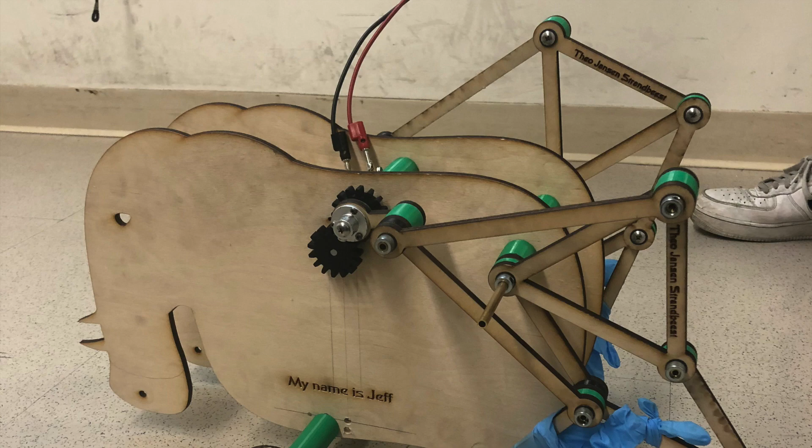What you're going to need for this homework assignment is your GeoGebra file with your Skew Pantograph mechanism, and then your SolidWorks program. I hope it's up to date, otherwise you won't be able to open past versions. Lastly, you'll want a snipping tool or some other note-taking software, whether it's just paper or a notepad.

For this first part, I'm going to open up GeoGebra and SolidWorks, and take a screenshot of my file and put it onto SolidWorks. So one of the first things we're going to do is open up your snipping tool or screenshot source. You see I already had it open from before, and here I'm just going to select new and take a screenshot or a snippet of the part that I'm going to measure out.

This process is very important because we're going to use SolidWorks to get the dimensions of the parts we're going to create. After you have the screenshot, you're going to go into SolidWorks and open up a new sketch. Then I'm just going to hit spacebar, select the plane, and copy and paste this in there. So now I have my screenshot in the picture. I want to make it a little bit larger and center it. Hold on, misclick a little bit.

So I have my model right here, and now I'm going to begin actually measuring the parts out. Before we begin, I've minimized GeoGebra and my snipping tool, and now I'm going to have just this notepad open so you guys can take a look at the steps I'm going to go through.

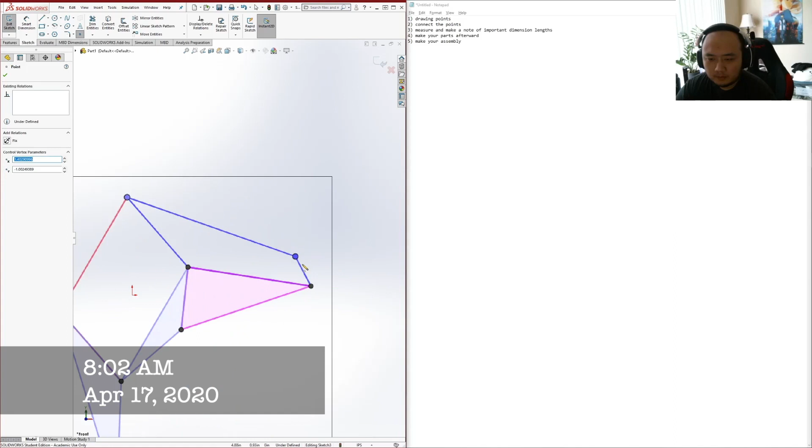So now I've put all the points on there. You may not be able to see the points after I've actually clicked on it. That's because they'll be removed once I remove the picture—or sorry, they'll be visible once I remove the picture.

So let's take a look at what that's going to look like. I'm going to first exit the sketch. I'm going to click this picture. As I pulled it away, you'll notice that the points are right in front of the screen.

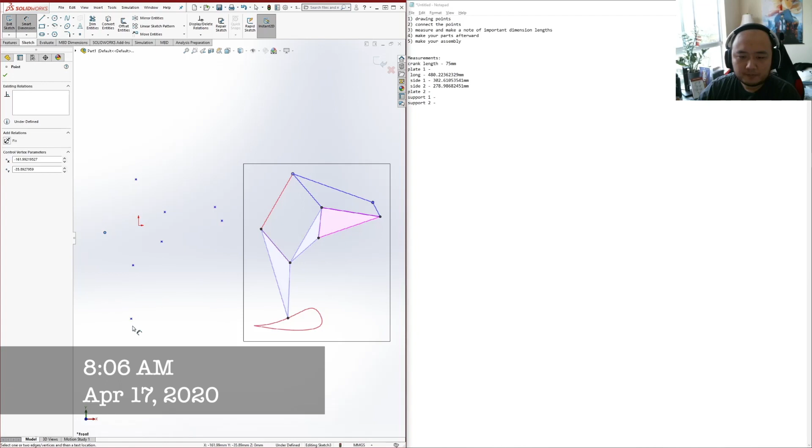I'm still on smart dimension. I'm going to measure dimension number 1 here and put that in. This is going to be my long side again. Then I'm going to have short 1, short 2, and we'll fill in those measurements when we get them. So now to measure this length, and then I'm also going to measure this length.

That's not correct. There we go. All right, so now I've put all these lengths on here. One thing you can do, especially when these lengths are quite similar, is take a screenshot of the dimensions of the triangles you're actually measuring out. That way it's a little easier for you to recreate when you make the parts.

Lastly, now I'm going to delete these three again because I no longer need them on my screen. I'm going to measure out these two supports. This top support here is support 1, and this one over here is support 2. So I'm going to click here to here and measure that out—that's going to be 211.

And then I'm going to exit out, delete that, and now get this measurement—about 301.43. And then lastly, and this one is important enough for you to consider, I will measure this distance out.

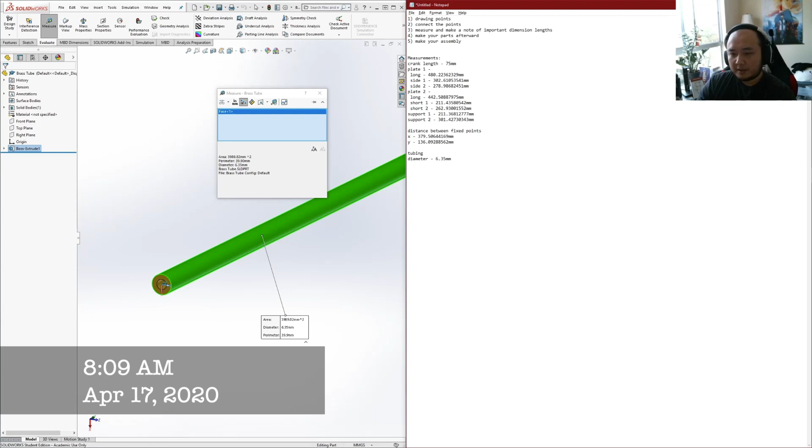This way I know to make the inside face or the inside connection points of my parts 6.35 millimeters.

To amend my measurement earlier, we do have an inner diameter measurement taken on the tubing. However, we will make it a little larger to fit the bushings, and this little outer diameter is going to be used to make the part a little more sturdy. This link width is what will allow us to make our final dog bone shape, and this will be in the files if you choose to use the ones I built.

So the following video, which may be muted, will just be me working through how I actually built these components. If you want to get a review or a refresher, see the mistakes I make, show that I'm human, that's entirely up to you. But here I'm just going to start with the first item, making the crank length of 75 millimeters, and I'm just going to start going with it.

So here I have just kind of gotten my endpoints. I have not defined any of the distances or the sizes. I'll do those in a second, but you'll see me creating the relations between the sizes just to make things a little bit easier for myself in the future.

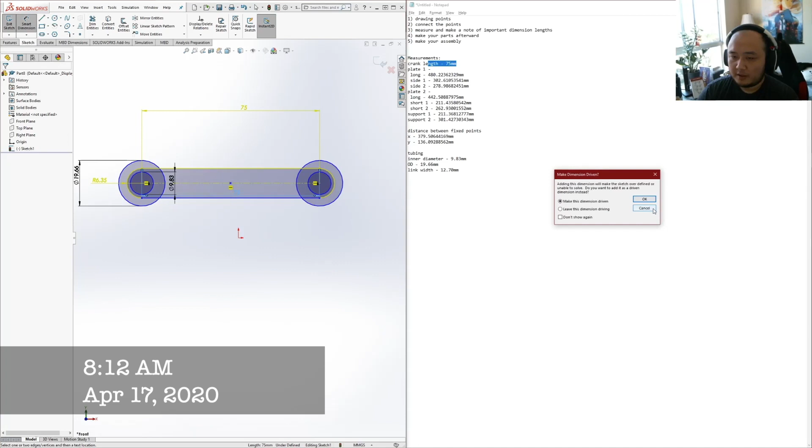If I did the width, ergo this measurement from here to here, I misclicked there. From here to here, you'll see that is 12.70, so we did that correctly. I'll just define that and cancel it. So now this is ready to be extruded.

I'm going to exit my sketch. I could have deleted some lines, but I'm going to do this a little bit faster, so you don't have to. I'm just going to define the parts that I want to extrude right here. So you have this out like this, and then it's going to be a quarter inch thick, so it's going to be 6.35 millimeters.

Also, if you want to see how we get there, open up a new window here, just to get it. A quarter inch to millimeters is 6.35 millimeters. There you have it. So that's going to be this part.

We're going to change the colors. You can do this on your own later. I'll modify this later, but just to show you how to change materials or appearances, you can go into materials right here. I'm going to click edit materials, go into the wood section. I'm just going to select pine for right now. I'll change this off screen later, and there you go, have the part.

So now I'm going to save this. I'm going to save this under the self-made, because I made this myself. This is going to be my crank. That's one part down. Let's exit out now.

I'm going to start working on plate number 1. For this plate number 1, I actually don't need to open a file. I'm going to click new file, set my measurements, MMGS, and then I'm going to start making it again.

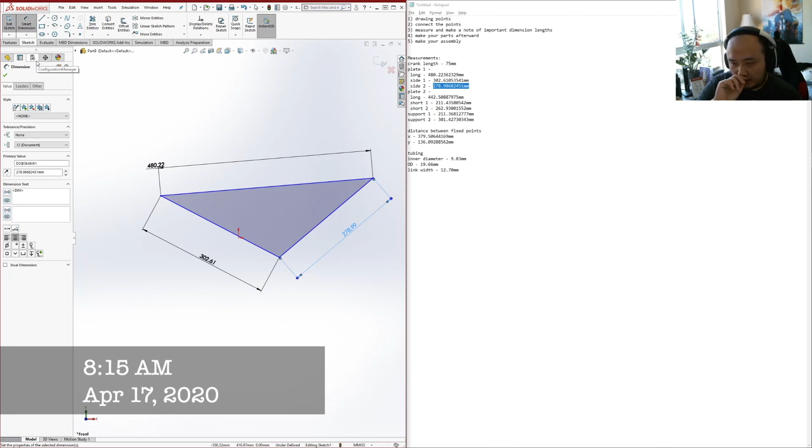So it's going to be 278 millimeters. I'm going to copy the entire thing. And there you have it. This is going to be my dimension part, which I'm going to use to reference my circles, and I'll delete it later.

So the points should all be here. I'm going to use my circle tool now to create these concentric circles. I'm going to arbitrarily give these a length, and then set relations again, so I'll control click all of these, and these are going to have the equal sizes.

Just to save myself some time later, I will also do the outer diameter right now, and I'm also going to set those. I did not mean to exit sketch there, that is not what I should have done. So I'm going to click back in.

I'm going to set the relationships now between these outside circles only, and these arcs should all be equal as well. So now when I change these size settings, you'll quickly see what it should look like.

Now that I have this, I'm just going to delete these center lines because I no longer need them. It does still keep the relationship between these center points, which is what these circles are built on. I'm going to define these with my outer and inner diameters again. This is going to be 19.66 millimeters. That changes everything you'll see now.

And here, I did click on the wrong circle. This is also incorrect, this should be the inner diameter, which is 9.83 millimeters. This outer one here is going to be 19.66.

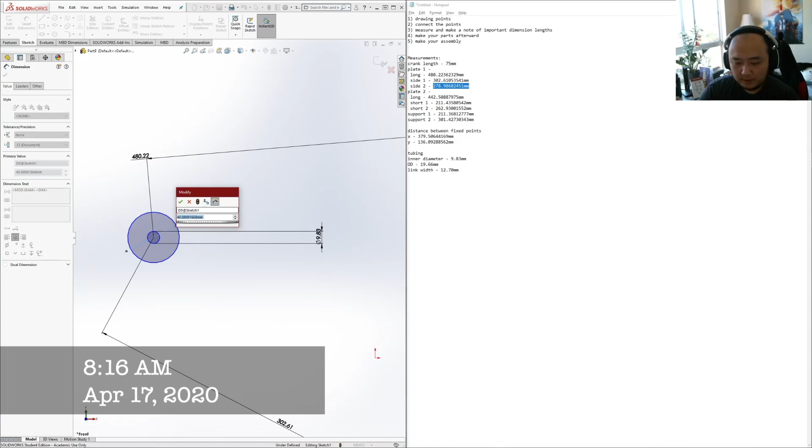Not everything I do is the best conventions, it's mostly for you to be able to see it yourself. And then here I will start making my slots.

I'm going to select straight slot, select here on the center, and then I'll fix these dimensions later in a second. Right now I'm just arbitrarily clicking just to make these slots. Give the center hole, and a random distance, and I'll smart dimension to make all of these.

So this radius is going to be the same as half of the link width I have here. Again, 6.35, that should be a 1/4 inch radius. I'm going to do that with all of these segments.

Here I'll show you how to do it if you wanted to just use the center line. This will be 12.7 millimeters, going to be the same size. And lastly, I'll do it here.

Right, and here I'm going to extrude it. I'm going to go to extruded boss and base, and select this. Now, if I just did this alone, it would come out with errors, so I'm always going to use selected contours here.

And then let's start selecting it. So this one's going to take a little more clicking. I could fill in the insides if I wanted to, but just for the sake of this, I will not right now. That's something you could do though, as an option.

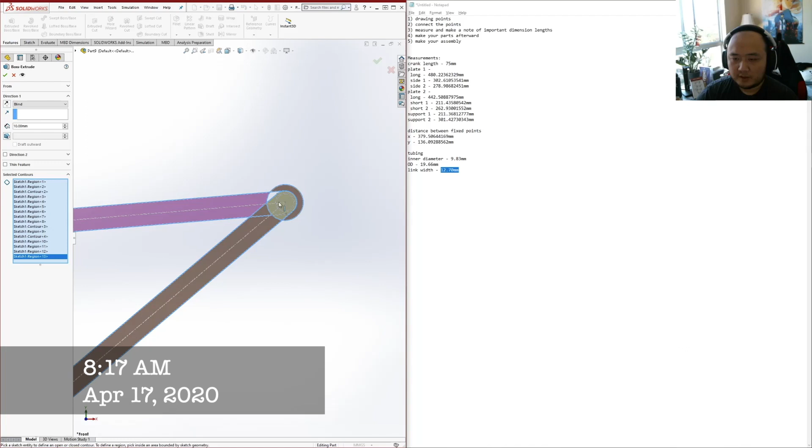So I'm going to select all of this together, and I selected that on accident. All right, so this should all come out. I'm going to make this 6.35 millimeters and click check.

Clearly I misclicked something here. That's one of the dangers of having all these sketches and contours together. It would behoove me to delete some of these lines, but...

Alas, so I'm going to zoom in a little more now. Hopefully I just select faces and I don't over-select any items.

And here I have these parts. I think that should be defined there, and let's see what it looks like. And there we go, the part has come out.

If you wanted, of course, I could select the inside area, that's something you'll have the option to do. I will select these materials and go from there. So I'm just going to keep it pine, but I'll change the color so it's a little easier to see in the future. I'm going to save this, just going to keep the name so I can reference it later. This is going to be my plate number 1, and I'll exit out and start the next one.

So I'm going to repeat this process. I'm going to talk less now that I've gone through these parts, and change my settings and just continue.

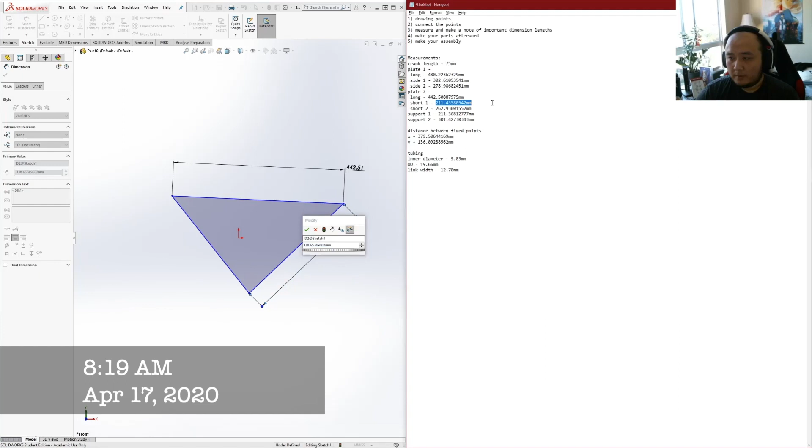I clicked exit sketch on accident, so I'll just click X to continue editing this. Now I'm going to add my circles and continue what I did before.

I'm going to add some relations to make all that equal, and now I'm going to do the same again with the outer circles. Of course, still a little mishap there, but that's okay - that's why Control Z is your friend.

Now I'm going to set these relations again. So click the arc and then Control Select, making sure you don't Control Select the wrong bits. Then set this equal to each other.

Now I'm going to smart dimension these for sizing. This is the outer diameter, which is 19.66 millimeters - by now you should be able to find this on the paper or the notepad I have on the side. Inner diameter will be 9.83 millimeters to fit the bushing. Now you see all the circles are here.

I'm going to exit out of smart dimension and start deleting these inside lines. And here is where these slots come in again, so slot here.

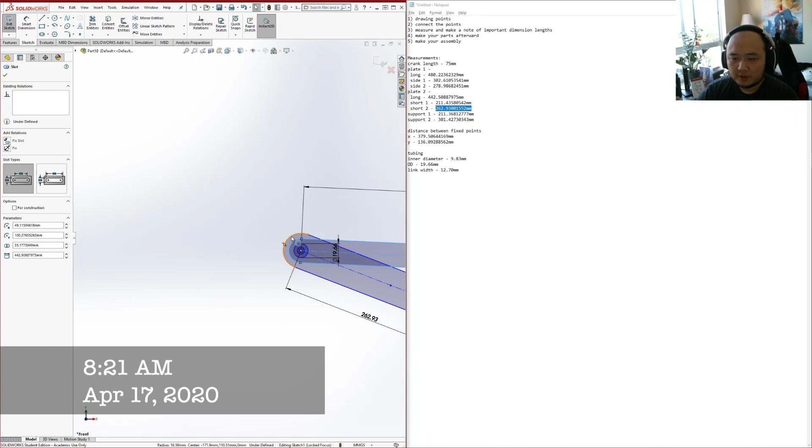Excuse me. And then I will come out here and set these arcs all to Control click and Control click. I'm actually going to clear all these selections because I realized I accidentally selected some extra items, so I'm going to select all these arcs again, at least these outer arcs.

I'm going to set them equal to each other. These do not have a defined length yet, so I'm going to go in here and define this inside diameter as my link width of 12.7 millimeters, and now they should all be the same size. This creates that dog bone shape we're looking for.

Again, if you wanted to, you can also fill in the inside - that would make it a little easier.

Here I'm going to select the sketch that I want to do, to get a better looking face after I apparently fix this. Again, 1/4 of an inch thick. And now I'll get the correct face that I'm looking at. Delete this contour and start selecting items.

This here. Get rid of that inside area - don't want that. All right, select that, and then lastly these tidbits.

You can see that I have the preview on, so it'll show you what the model generally should look like, and this is going to come out fine.

This here I accidentally selected the circle, so I'll just go back in here, and then I'm going to go inside, look from this top view, and just click the center circle. That should remove it, and voila, there we go.

So I have this now, and I will go in here, change the materials, edit material, and go back to my pine wood.

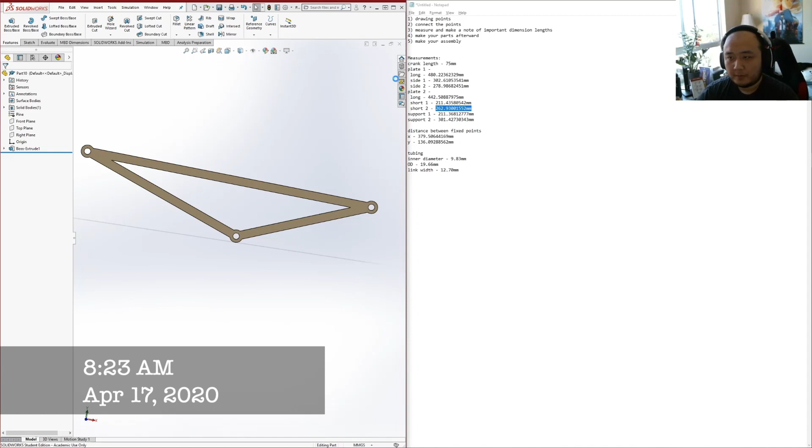This is going to be my second plate. Save it as plate 2. Exit out to save memory, select new, and let's start making our last two bars here.

So here, this is going to be relatively quick. We're going to make it the same way we did with the crank. I don't know why I used the origin in this situation, but that's okay. I'll keep these horizontal - I'll define those in a second.

Just make all these circles here and then make my slots. You'll see that I'm doing this all without giving much of a care for what the dimensions actually look like, because that's what I'm going to address after they exist.

So first, most importantly, since these are already horizontal to each other, I want to make this equal. And I want to make these two also equal. And here I will now define what the distances are going to be.

So center to center distance here for support number 1 is 211 millimeters. That's going in here. So that's been set now. It says 8.32 because I was a fool and I didn't change this to MMGS.

So now I'm going to go select that, go back into editing sketch, and you'll see that it is showing it correctly now. Next I will change these diameters here: outer diameter is 19.66 millimeters, and inside diameter is going to be 9.83.

That's all the way in there. Now it's time to fix up this slot inside. This is supposed to be 12.7 millimeters. These are not the values you change. However, the value you will change is this larger one out here for when you design your own part.

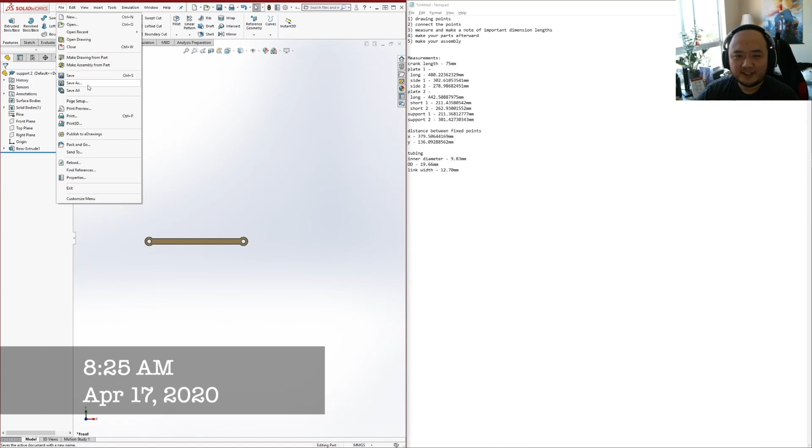Let's go into wood, select pine, apply, close. There we go, we have color. I'll save this as support 1 or 2 because I am a little dumb. So I'll hit file again, save as. Change this to support 1 and I'll just save over the other one as I make it.

So now I'll make support number 2. This time I'm not going to forget to change the units on the bottom. Extrude my boss and base, whatever you want to call it, and do the same thing.

This time I want to make this circle outside, so I'm going to put my cursor over here and align it. Once you see that center line, it means they will automatically be made with the definitions that they are going to be horizontal. I'm going to do the same thing, make it over each other. This will overlap a little, that's okay.

Make my slots. You'll see that I don't really need to worry about the dimensions because I'm going to set those afterwards. So I'm now going to set the relations, set these equal to circumference, same with these guys, set them equal. Now it's just time to dimension it.

So this inner distance, which is again what you'll be changing, is going to be what I copy and paste on my screen for support 2. Inner outer diameter, I don't need to repeat that anymore. I hope not, at least.

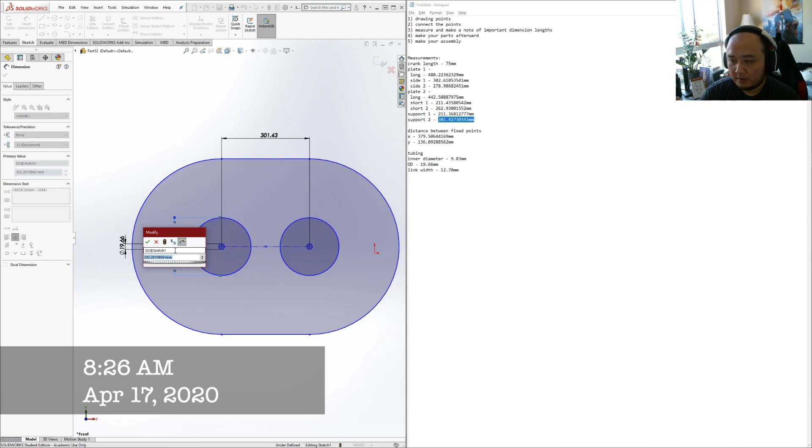I see I set that to meters instead of millimeters. That is not a cash money move, but I modify that to be a little more correct. Now the inner diameter, and lastly this slot distance, which we're going to decrease immensely.

Leave that smart dimensioning, exit the tool, go to features, and there we go. It's time to extrude this boss, and now I get to select my contours. Zoom in. Go over here. And away we go.

Edit the materials, back to the right material. And now what I'm unsure of is actually whether I did the thickness correctly. At first glance it does look correct, but I'm just going to edit feature to make sure, and it is 6.35 millimeters or 1/4 of an inch.

So I'm going to save this as support number 2. It's going to ask me to prompt to save over it because I made the first one incorrectly. And with that, we have all the parts that we're going to use to eventually put this together. And away we go now.

So on the bottom right of the screen, I have some of the parts that I've downloaded off of the class website, files given to you by the professor. These are the brass tube, the bushing, the motor, the set screw shaft collar, and the spacer. I'll probably move some others in the future, but these are some of the parts given to you that we'll be using to make the assembly.

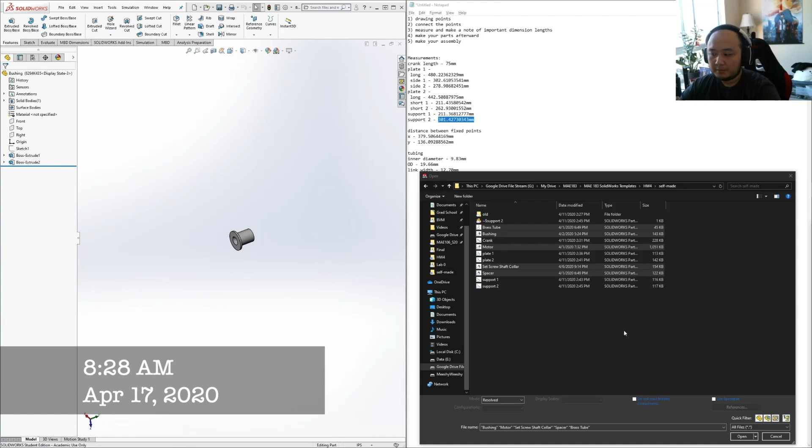So one thing I did add to this assembly before beginning is the base. I'm going to open up the base right now. We're going to modify this so that you can actually create your attachment here. What I'm going to do is first remove these holes because I don't need that anymore.

But for this base, I need to make this a lot taller so you'll be able to see my part actually move. So I know that this is going to be quite long. Of course I can always hang it upside down, but I'll try to make this a little cleaner.

So to double check our height, we can always reference back to our model on Geogebra to see how exactly tall this is going to be. You can also estimate, or I know that at longest extension, I'll go from the longest point here to here, plus the longest point here to here. That should be sufficient for my heights.

And I have those lengths here on my plates. So my two longs added together make it about 1 meter tall. So this is a very large object. So I'm going to go into this model and edit this sketch.

And then it's going to slowly appear. Give me one quick moment. I realized this was extruded from the top, so instead of that, I'm actually going to change the feature.

The feature extrusion will be 1 meter, so this is going to become very tall now as I rotate this. Is this a realistic base for you to make? No, because this base is very small. Just for feature's sake, I will actually make this a little bit wider of a base.

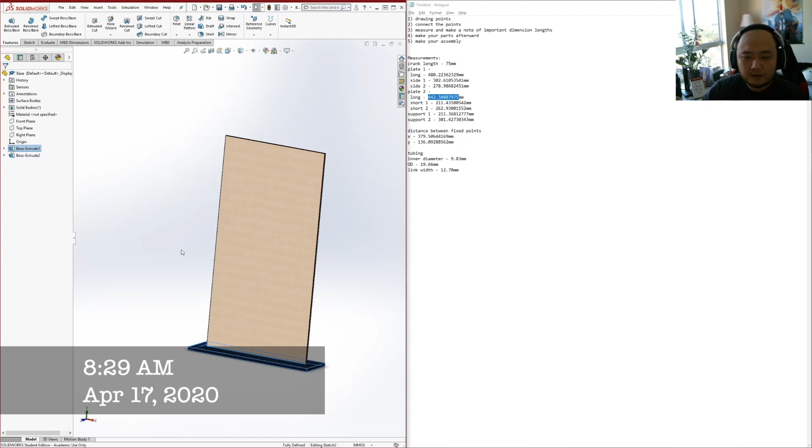So we can feel a little bit better about ourselves, I'm just going to make this 1 meter out, and we'll make this about 1/2 meter across. Nothing too crazy. It's going to look a little large, but that's also because our assembly is going to be a little larger. Now we also need to remember here, the positioning of our distances between our fixed points is going to be critical.

So we can choose one point arbitrarily, and this is going to be, I should make this a negative actually, so this is going to be to the left. One point's going to be to the left 379 millimeters, and it's going to be up 136 millimeters from right to left. So I will choose my right point arbitrarily.

That's going to be a cut done on this surface. And let's face this face now. So I know that my circle should be somewhere up top, because I do want to make it a little bit taller. I'll place it right here. I know that the hole for my brass tubing and bushings is going to be 9.83 millimeters.

And then now I need to find XY coordinates apart. I'll first make the circle arbitrarily, and I will make this relevant to this hole. That's going to be equal radii. So now this is the correct size.

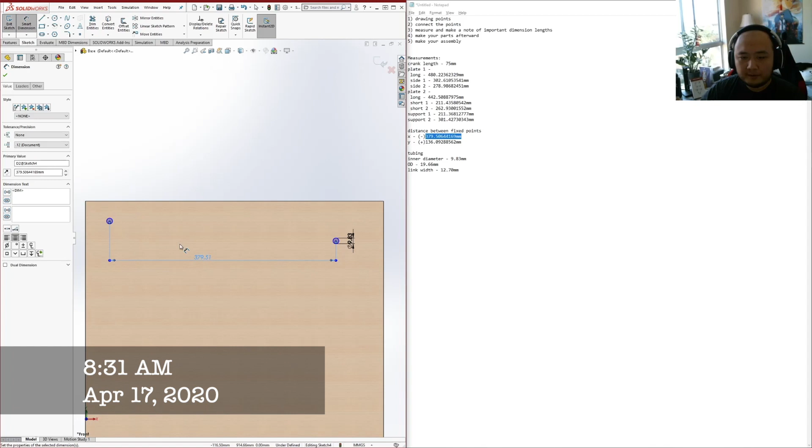And for dimensions now, I'm going to have to smart dimension this to this point, but I'm going to do it first horizontally. This is going to be 379 millimeters apart. Now this is going to be, since this is our starting hole, this is going to be fixed. This will move here. And then I do know that it needs to go up by a fixed amount as well, so I'll click the checkbox here, and I'll smart dimension the y coordinate here.

This will be 136, I don't know why I'm typing, I'll just copy it here. So this one pushed it down, which is actually good for us. I was about to say I should have defined it properly first, but I got lucky in this case. So I'll leave this as is.

I'll exit my sketch, and this will ask me to put my hole through. I think 10 millimeters is just enough to get through this. I don't think that's actually the correct dimensions. This should be, I believe, I don't think it is. Yeah, but I'm quite confident this is a 6.35 millimeter hole, so I'm actually going to modify that right now.

And I think this is the feature I need to change. I think this should be 6.35 for a 1/4 inch piece of plywood. It could change, but this is just so it's the kind of realistic materials you might get. You could also go up to 1/2 inch. You could get a 10 millimeter piece, but I don't think many American companies will sell that to you.

And so this is going to be my base. I'm going to save that now, and then we'll begin with actually trying to put the assembly together without any of the fixtures first, just so you guys can get a view of what it will look like.

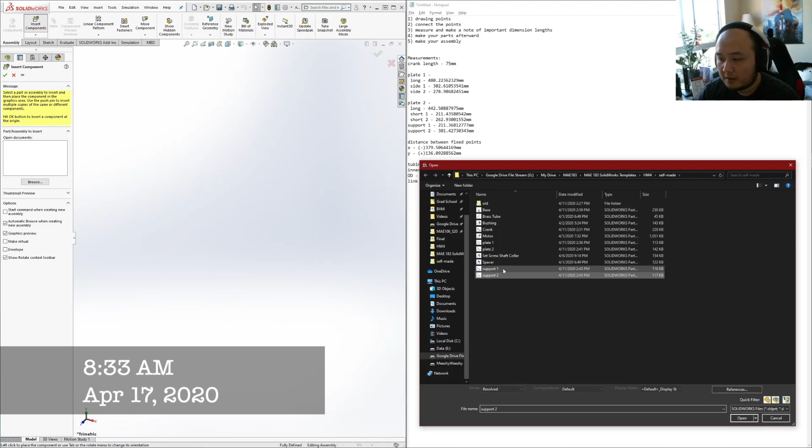Now it's time to make our assembly. I'm going to start adding a few parts in here, and we'll just kind of work through it together. I'm going to do these parts without the additions of the tubings, because those will mostly be concentric mates anyhow. I also do want you guys to see your part together so we can make any modifications before finishing the assembly. This may be a method that not everybody will like to do, but it's sort of how my brain works the best. So I'm going to open up all of the parts that are pertinent to my design.

So the 5 parts I made earlier, not that any of these are not pertinent to the design, but I'm going to open these first. I did forget the base, but I'll put that in here in a second. I'm just going to slap these in here first, and then we'll go from there. Alright, so I'll add one more component. That will be the base.

My very tall base, mind you, it doesn't look too tall now it's here. So because the base is probably the... well, it's the base, I'm actually going to fix it.

I'm going to right-click and hit fix, that way I can't drag this around. The first part that I added here, that's going to be the crank. This needs to be floated, because the first part you put into assembly will automatically be fixed in almost all scenarios. So on my crank, I'm going to start making some mates, just so we can get a general floating design.

It's not going to have any of the actual connections. I want to have everything touching, and I'm just going to have it concentrically move. So I want to pick one of these parts on the crank. I'm going to make it, this is where my motor should be. I want to make that concentric.

I'm not going to actually reference the distance yet because that'll be useful later. And then I'm actually going to open up my Geogebra file, or your screenshot, whatever's better, so I can get an idea of what mates are supposed to go where.

So in this part, I know that this hole here, I'm actually going to need to flip it, so you're going to have to think about this part being 180 degree flipped in a sense. But this part is going to be relative to the moving circle here, so I'm going to mate those two.

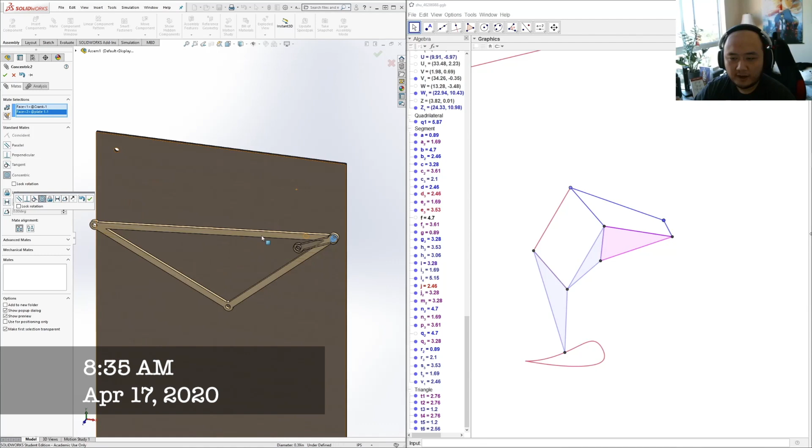Select my mate option, select this inner area, and since it's concentric, that's going to make me very happy. However, I do want to flip it, so I'm going to click this button here and make it anti-aligned. Now it's flipped to look like this.

I'm going to hit checkbox, and as I move this, it can move in, to me, the inside and the outside frames, but it will not move these circles if I actually change the view. These circles are always going to be concentric no matter how this moves.

Even though on a 2D plane it looks good, in a 3D plane they're nowhere near each other. I'm just using this 2D plane to check that this linkage actually looks okay and doesn't run into any other major issues. So, looking at it again from the side, I have this linkage here.

It's going to mimic this kind of position. And now, I'm going to connect one of these bars here. So this shorter bar represents these 2 points, this connection.

I'm going to mate, open up the mating option. I'm going to select this inside face. I'm going to select this circle as well. Make them concentric, but I will not change that other position.

Rather, I will now also create another mate that puts these objects together. So now I'm going to copy that mate. And now when I look at it from the side here, I have this.

So as this bar moves, you'll see what this motion looks like. Again, this view only works in a 2D view, because if I look to the side, you'll see it's not looking that great. See, I can move this in a bunch of random positions.

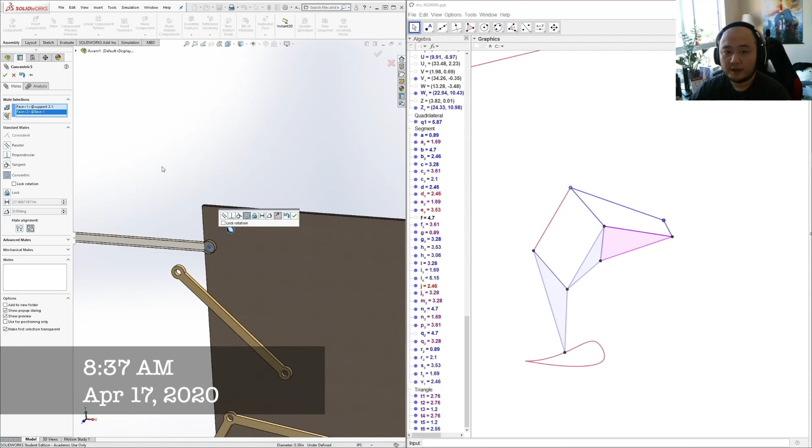So it's like that's concentric. Look at it from the side again here. And now I'm going to have this last piece. So this piece is going to look a bit like this. This can move because it's not forcing these to move.

And this part will also need to be flipped eventually. I will select a mate, and I will select one of the easier mates to do.

I know that this point here will always connect here. The only challenge is envisioning whether this is the correct angle and alignment, or if I should choose the opposite alignment. I recognize that the shorter leg of this triangle should be connected up here, and the longer leg should be outside. So I know that this initial alignment would be correct. You'll see this more in a second.

So now that I have that mate, I'm going to select this inner circle, which will align with this part, and I'll do a concentric mate right here. So that's all set up now.

Now from the side, this does not look very good. I've seen better days. But from this angle, we have the ability to see something happen. Now I need to break the singularity. This is something I am at fault in right here. There we go, broke that out.

It's just a little bit of SolidWorks geometry, but this is my leg. And now as I turn this arm, see I kind of have a little bit of a seizure. This is generally a sign that something may not be working correctly. Note that this one was not created because that's just made by the board. It's kind of useless, wouldn't make sense if you actually made it.

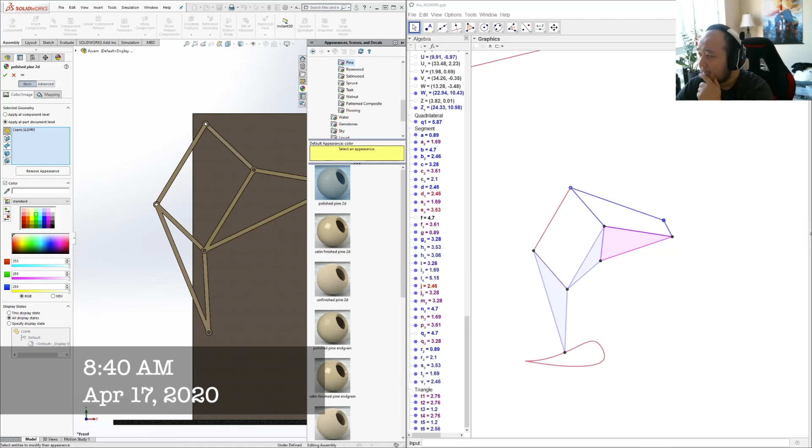So for the crank, which is what I have selected, I'm going to make it a pretty bright green. You can also make it custom colored here, but let's see how much of a neon green I can get. Maybe I'll just keep it a dark green, it's a little easier to see, I think. So I'm going to click checkbox, and now it's easy to identify which one is your crank.

Next, I'm going to look at the coupler and the follower. The coupler I will make blue, and the follower I'll make red. So I'm going to right click the follower, select appearances, do just like I did with the crank, and I'll try to make it an obnoxious red. Check the color blocks, and let's see what's the most obnoxious red I can give it. That makes it obviously red. I think this should be apparent that it's red, at least compared to everything else.

And then lastly here, I will now select the coupler, which will be blue, appearances, plate 1. Here I will select color, and let's try to do... these don't show up very well, but this is a nice dark blue. This should be very apparent which color is which now. We'll select that. For these here, I will just keep them their natural pine color. If you feel a need to change it or modify it on your own, or when you make yours, that's going to be up to you, but do not duplicate these colors.

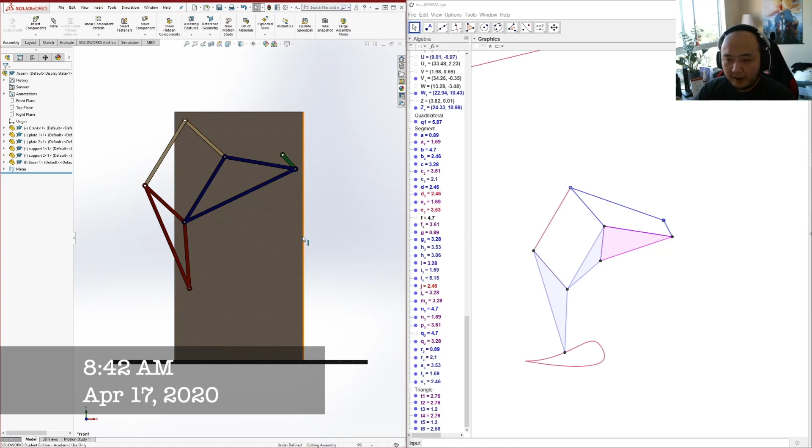The first component will be the motor itself. I won't put screw holes for it in this model. However, the motor will be attached on the back side of this assembly, this face, and it'll peep through. It will have some attachments and connect to the crank. I'm going to first put that on there. You'll see we'll need to make some modifications to the crank afterwards, but I want to first put the motor in before. As we add parts, we'll realize the pecking order of how these linkages and couplers should be put on.

So first I'm going to insert a component. I'll be adding in the motor, which is a file given to you, and I'm just going to click arbitrarily on the page to add it. The important part of having this motor in here is making sure that when you put it in, this hole is going to be concentric with this hole on the board.

Then I'm going to push it in a little closer. You'll see that it'll stick through the hole here, and it won't get past this part. So what I'm going to do is select this hole and make it coincident with this plate, so it's as far up as it should be able to go. You'll see that it's stuck there, and it comes out here.

To me, this hole should be made larger actually, so that you can fit the entire part of the motor in, because there are holes inside of the motor to attach it. I'll make this transparent really fast just so you can see what I'm talking about. There's these holes here that are meant for M3 screws to attach the motor to the panel.

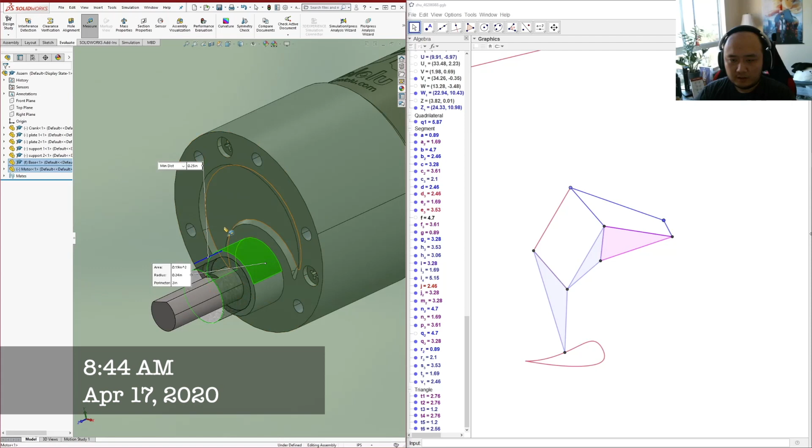So what I'll do is measure the outside of this cylinder. It's a radius of 0.24 inches. So I'm going to edit my part, knowing it's 0.24 inches. I'll make a note of it on my notepad: motor shaft max D is 0.24 inches.

I'm going to get out of the measuring tool, change this transparency back to normal, and select edit the part. You can edit the part in the assembly, which I think is really great—it just makes life a little easier for you. Then I'm going to edit the sketch for this cut extrusion.

I'm going to make this 0.24 inches. Now, one problem here—actually that was the radius, so I need to double that. That's going to be 0.48 inches. See, I noticed it got smaller—gotta be a little smart about my work.

Unfortunately, because this size changed and I fixed these two hole sizes, this one will also be a little too large. So what I have to do now is select this hole, delete this relationship, and use Smart Dimension to define its own size. This should actually be the outer diameter of the tubing—the inner diameter of the tubing, which is 9.83 millimeters.

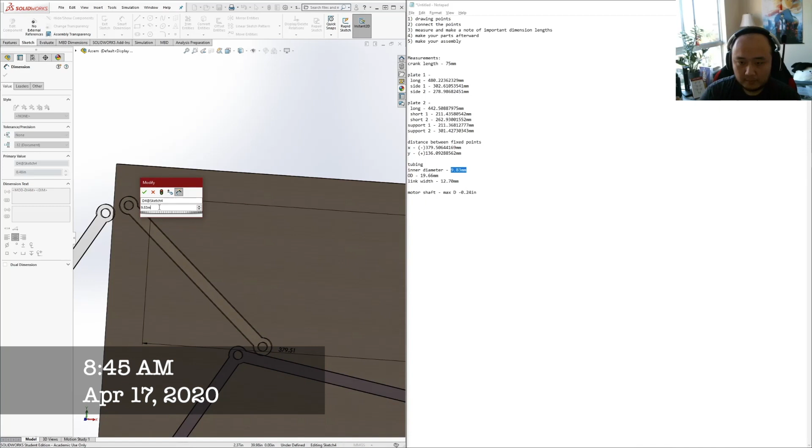So I put that hole in. I'll check my dimension, exit my sketch, and take a quick look at what this looks like. I'm going to exit out of the edit component button, and I should be good to go. Because this mate is a concentric hole, changing that diameter shouldn't change the actual parts itself.

What I will change is I'll go into the mate and delete this coincident mate, because that's not what I want. Instead, I want to make this panel coincident with this wall, and I'll have to slide in a little tighter here. I should have clicked mate first—that's my fault. I'll click mate, select this face, and select this back panel of the board to be coincident. Now this motor is pushed all the way up. I'll look over here—you'll see that it is a very clean fit with the shaft in here.

And now you're ready for the next step, which is going to be to put on the crankshaft collar, which is another part given to you. I'm going to save this as well, because that's a good practice.

Now that the motor is on your base plate, you're going to add the wheel hub, which is another part given to you. Here I click Control Open to show you what it looks like. This is the wheel hub. You will use a set screw to attach your parts, and these holes will attach to your crank. This attachment to the crank is something we'll have to modify the crank to do. I'll demonstrate that after I attach this into the assembly.

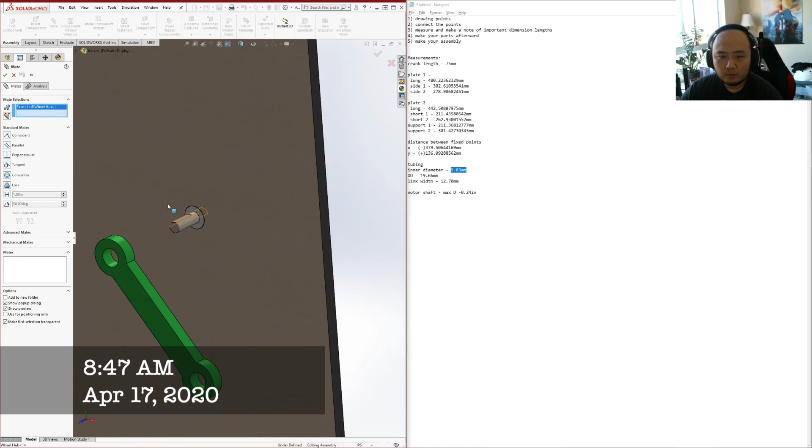I'm going to click Insert Components, and I will select the wheel hub. Click anywhere arbitrarily to place it in the picture, and now I will select a mate with concentricity between the inside of this wheel hub and this bottom semicircular part. Now you notice that this went in backwards, so I want to change the mate alignment to flip it. Now I notice it flipped in the correct direction.

I'll hit checkbox. We can't find the part, it's stuck back here unfortunately, so I'll need to make this part transparent to go find it, and I'm going to quickly drag it out and change this transparency back. That's something that will happen sometimes because of my arbitrary placement.

Now that this part's out here, I do know from experience that this wheel hub is not meant to go past this divot. Essentially that allows you to put a set screw through this hole that's highlighted onto this flat bar of this motor shaft. This is called a D-shaft motor. You can guess why it's called a D-shaft motor.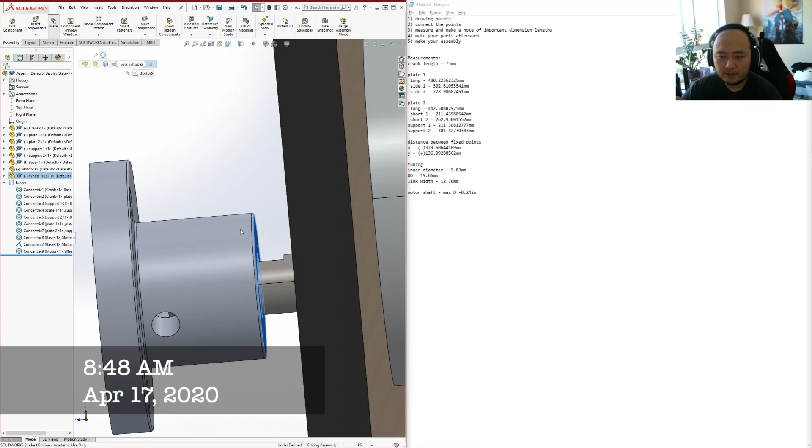I'll try to align it the best I can, hope it looks good, or for posterity's sake, I can just select, now note I'm doing this arbitrarily, this back end of the hub, and then I'm going to have that cap out right here. I don't want it to go any further than that. Now with this a little transparent, you'll see that the set screw will be able to fit inside of this as well, so this will be my arbitrary designation. Select that, hit OK, and now this should be quite well defined while still being able, I believe, to spin.

Now you notice that these holes are not the same dimension as the crank's holes. When I line up this crank, put it face to face here, you'll notice that there's no way for me to actually attach this through these holes. So I'm going to need to open up this crank model and make it the size of this outer diameter.

So I'm going to make a note here. This is a new section. I'll say this is the crank to hub measurements. I just like labeling it so I know what I need. I'm going to clean this up as well. So crank to hub, I know that the hub diameter or outer diameter...

...is found by clicking evaluate, measure, and then this outer diameter. This outer diameter is going to be 1.11 inches. So that's what I'm going to need to change this outer diameter to.

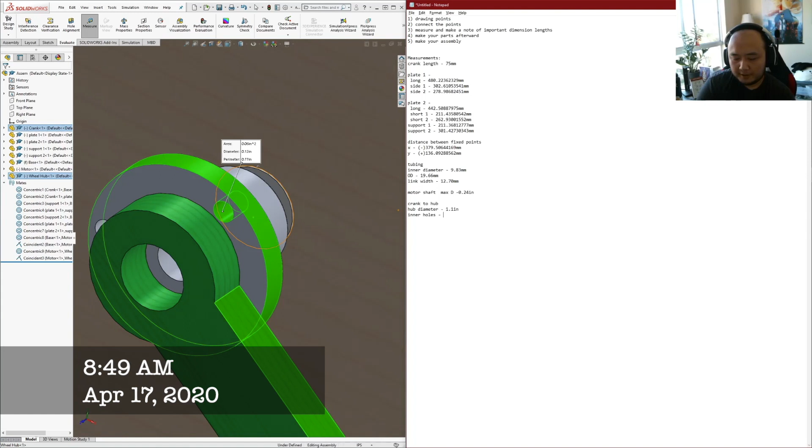And then I'm going to need to align these holes. The holes are going to be 0.12 diameter holes. So inner holes, again I'm arbitrarily naming them. I could also say these are the screw holes. But these are going to be 0.12 inches. And it seems that they're spaced out every third, so this will be 120 degrees. I'll use probably a revolve sketch for that.

We'll go through this together right now too, so don't worry. Speed through this if you already know how to do this. Everything else should stay relatively the same.

So now I'm going to edit this component. Well, first I'm going to click out a measurement. I'm going to right click my crank and then I will edit my part. Now that I have this open, it may be distracting for you to have all the other parts, so if you'd rather rebuild it on its own, that's entirely up to you. I'm just doing it on this assembly because it's accessible.

So here, I know that I'm going to want to create a larger hole. Now I'm going to go in here and I'm actually going to change the only feature on here, this extrusion. I'm going to edit this sketch. Upon editing this sketch, I'm going to modify this outer diameter, which is also going to modify the outside of this. So before I do that, I kind of need to take a step back.

You know, I also make faults too. I'm going to select this outer diameter, this one as well, and I'm going to destroy it. I'm going to delete the equal sign, so that way when I change this outer diameter, this one won't change. But because I broke that, this outer circle no longer has a dimension.

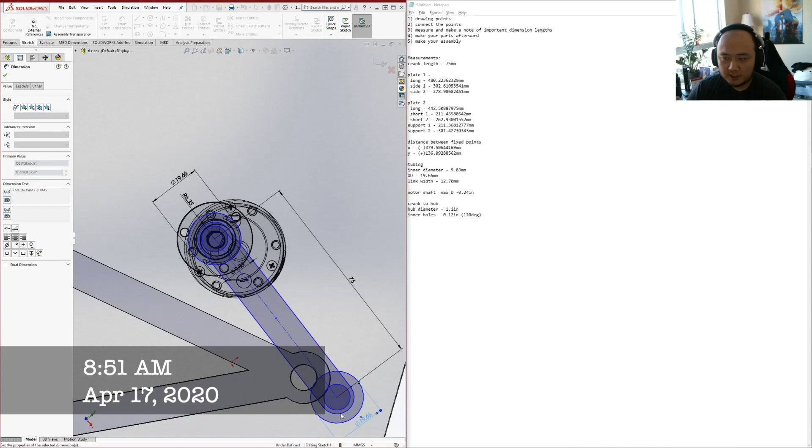So I'm just going to quickly dimension it since nothing changed. It's already 19.66 millimeters, that's the outer diameter of the tubing. Instead, I'm going to smart dimension over here that it needs to be 1.11 inch. This says it'll make it driven, and I think that's because I should have edited this instead of redimensioning that. I apologize for my mistake.

I'll make this 1.11 inches. Now it's the size of that hole. Exit out of smart dimension. I'm quite happy with that.

And now I'm going to need to add some holes in here. First I'm going to exit this sketch just so you can see the component. Now this is nice and aligned with this size, and I'm still in the edit component phase, so now I'm actually going to create a sketch on this surface to put the holes in.

Now putting the holes in, you might ask, should I actually find out where the holes are and build it on top of it? The answer would be no. I'm actually going to need to create a different measurement, so I'm going to exit out of this edit component section. What I need to find is the distance from the center of this circle to the inner radius, or the inner circle here, because they do share that same concentric point. So I'm going to click my measure tool.

I'm going to click this outside sketch line, and I'm actually going to select this inside circle. What this measure tool should show you, if I pull it over here - oh, sorry, I have an extra part here, this face that I need to delete. So now this is going to show me some distances. This is where some math comes into play.

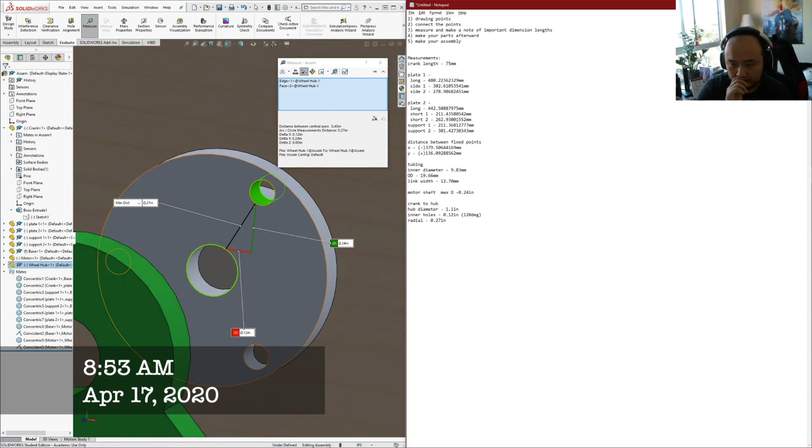In my notes here, I'm going to make a note that I know what this inner hole radius is. There's also an easier way to do this, I'm just not going to do it right now because I want you to figure out how to use the tools you have around you. So I know that this hole, this minimum distance, this radial distance is 0.27 inches. I'll say radial 0.27 inch. And then I'm going to clear my selections.

I'm going to find out what the radius of the center hole is. So this diameter is 0.25 inches, or inner radius will be half of that, which is going to be 0.125 inches. That means the sum of the radial and inner radial portions will get us to the outside of this circle. I'll show you that again right here - or actually no, this brings us to the closest outside point.

So then I need to also add the radius of this outer hole. I should say this is inner hole's diameter. So knowing the radial plus inner radius plus inner hole's radius is going to be equal to the total distance from the center for crank holes. You can go back and rewind that, try to follow me if I lost you on that, but we're essentially using the parts we're given to measure out how we're going to find these hole centers.

So this summation will quickly, if I just do it really quickly here, should be 0.395 - we'll make that 0.3, 0.4, 0.455. If my math adds up.

Just because I'm bad at math, I'll pull up a calculator. 0.6 plus 0.27 plus 0.125, this should be a 0.06. So see, I make mistakes all the time. 0.06 plus 0.125 plus 0.27 is 0.455, which is what I have.

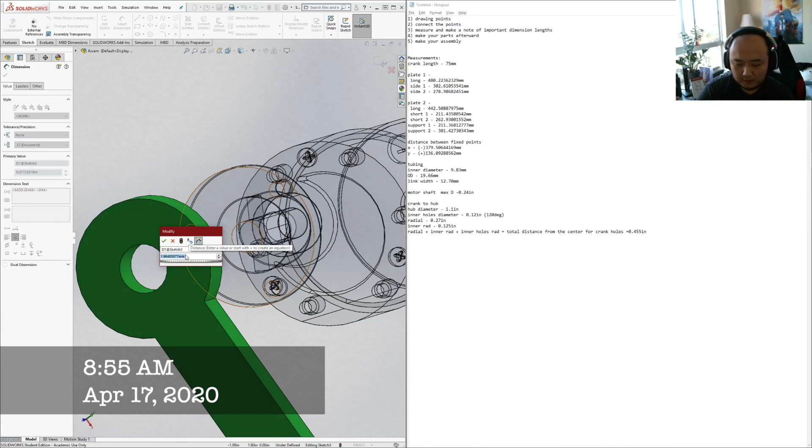And then I'm going to start adding some dimensions. So I know this hole should have a diameter listed here of 0.12 inches. But where should these holes go? I know that this distance from this hole, so I still have smart dimension on this center, to a view from...

Now that I think of it, I actually can't get the center hole here because I didn't create it on this plane. But hold on, let me see if Smart Dimension lets me do this. Okay, Smart Dimension still does let me do that from center to center. So I know this is going to be 0.455 inches, so now this is the correct distance out.

The last thing I'm going to need to do is create 3 of this, so I'll create a pattern. On the top of my screen there's a circular sketch pattern option, so I want to create a circular sketch pattern. I want 3 of them, and I believe it should be out of 360 degrees with equal spacing. The entity I want to pattern is this circle.

Not along this radius because it's asking me to select a point. But what I need to do, and I don't always remember this, is just pick where the selection point is. So I'm going to get rid of that point and try to select this center point instead.

That's not what I want, I want this hole instead. Being able to select this point is actually my main point of concern. I can also select this inner radius because it does share concentricity. Now I just click the checkbox and it'll give me all 3 of these circles defined.

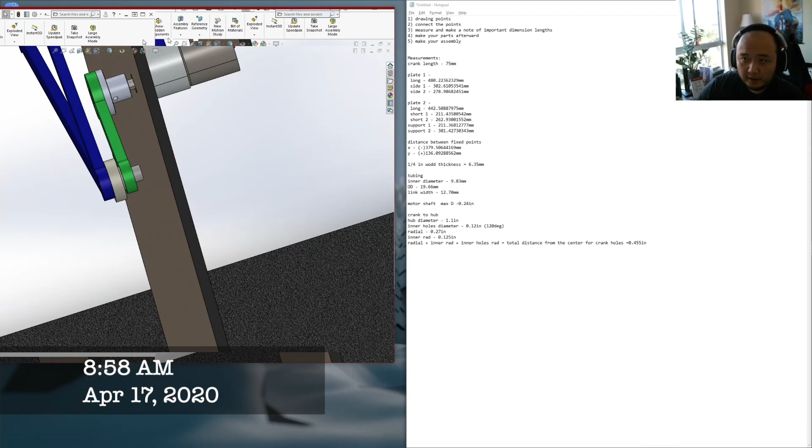I'm going to quickly make an addendum to myself as I actually spaced this bushing incorrectly. So I'm going to pull up the mates relative to this part, delete those, and then go on from there.

So let's look at bushing number 1, and then I'll select the mates in assembly, and I'll actually just edit this coincident part of the bushing, edit this feature, and flip its alignment.

Now this is good. It did break some other things, but that's okay, those are what I will need to fix in the future anyhow. So now with this bushing, we need to change its coincidence here by deleting that.

Let me see one more. Okay, yeah, now accessing the bushing becomes a little bit of a problem. I'll have to make this work, I'm actually just going to suppress this part and pull the bushing out itself.

Now I'll unsuppress this part, apologize for the potential confusion. Then I will try to mate. Oh, that bushing disappeared, oh, that went very far places.

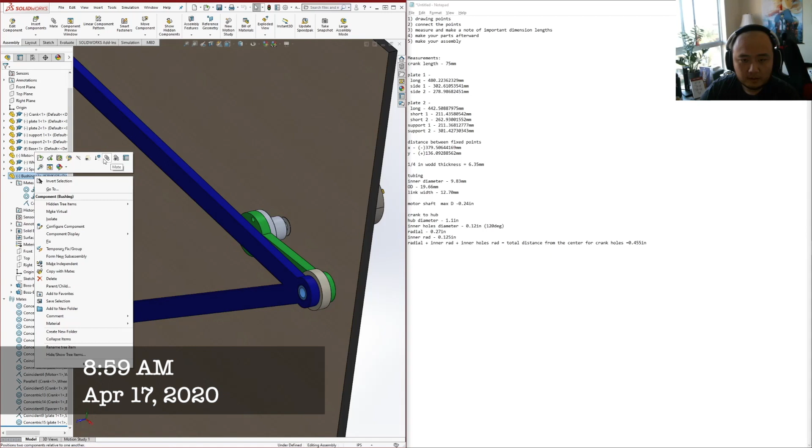So finding that bushing, I'm going to pull it back out. Bushing, where are you? I would like to mate it with this outside edge. Clear selections. I do want to mate this, can I pull the bushing out? No, I can't, something else is locking it in place.

So you guys are seeing me struggle with this a little bit. Now my solution here is actually just to delete the bushing and re-add it because I just did it so poorly in the initial place. I tried to fix it, saw it wasn't worth my time, as I could have just added it in the assembly again and remade it.

So here I will first make this coincident with this back face because this will allow us to put the lock on it. Make that coincident, and then next I will make the outer radius concentric with this inside radius because it should match that size. Let it go and we should be good to go here.

So if I make this transparent, you'll be able to see the bushing go through here, which means it's effectively put in place. All right.

Next, this means I've also forgot to connect one item here, and that's going to be another bushing from the coupler over to the inside. So I'm actually going to break one of the mates that went between these two plates. This went between this spacer and the coupler.

I'm going to move it back, and I'm going to insert two components. I'm going to insert a bushing as well as a spacer.

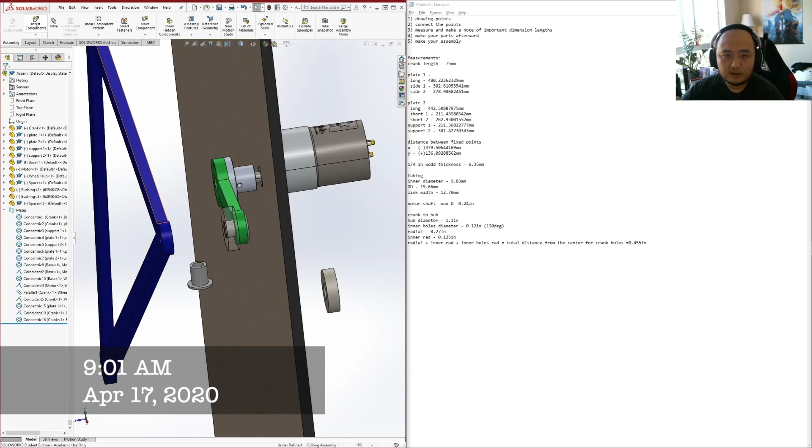So put these two in. First thing I'm going to do is put the bushing inside its correct position, so the outside radius is going to be concentric. Okay, see it's concentric here, hit a checkbox. But I will need to make this face coincident with this outer face, so I'm going to highlight that, select this, and then flip the alignment.

And there we go. Now that this bushing is inside, I can take this spacer and add all the mates to fix it in. You should start to be getting the hang of this now.

I'll make it concentric to... I'll just make it concentric to the spacer next to it, actually. This is where, actually, that's a bad mate to do. What I did, I was almost very lazy, and I almost selected a different mate as my basis, but if that mate ever changed, I would probably be in a pretty bad place. So I'm going to fix this transparency again.

Instead, I will mate the spacers to each other so they essentially make one larger bit. So I make this coincident, and then I will also make this concentric with its spacer right next to it. That way they are going to be, call them buddies.

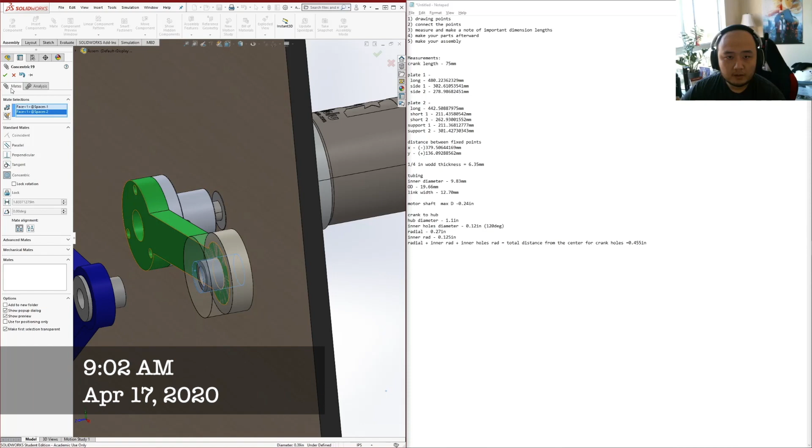All right, that's there, and then I'll move this over because I do want this face, not this face, to be connected. So you'll see building the assembly does take quite a bit of tedious work. I wouldn't say it's very conceptually difficult, but it takes, I got to think about it once in a while and be like, okay, is this the correct way to attach it?

So now what's left to do is actually attaching this face and making this coincident with the face of the spacer.

So after I make that selection, I can make this transparent really quickly. I'll see that my bushings do not hit each other, which is important, otherwise this would obviously pop out. And then I will make this not transparent anymore. You can also go select the actual part here and it changes transparency as well. You don't have to right click it like I've been doing.

So I'm going to save this, save my work thus far. There we go, it's saved, and I'll look at it from the side, make sure none of my motion is broken. So now as I'm turning my crank, this is going to be important for the motion study later, you'll see that it is indeed moving.

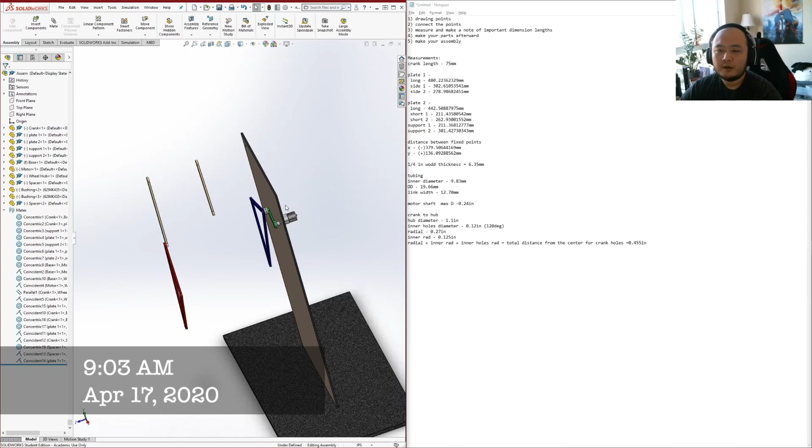And still fixed together. But now we're going to have to add these three other parts. So I guess I'm going to just keep on working through it. Feel free to play this over and over again if you want. Skip back, skip forward, play me at multiple times speed. I'll use this to try and put it all together. You'll see me succeed and fail at the same time.

So now I'm going to look at this from the side view again and look, okay, where's my next point that I want to manipulate and start mating? So to me, I'd like that point to be right here, this point right here.

And so I'm going to add another bushing and spacer. Remember, bushing and spacers will come in pairs, one bushing, one spacer coming right up. And also, if you're a little more diligent than me, you can actually go over here and rename these bushings or rename these parts inside of the assembly so you know what connections are where.

I'm going to put this bushing inside of this concentrically, mate here, and then I'm going to also add another mate, not that face, but with this wall connecting to, well, it's coincident with this face. That makes me happy. And then I will take this spacer.

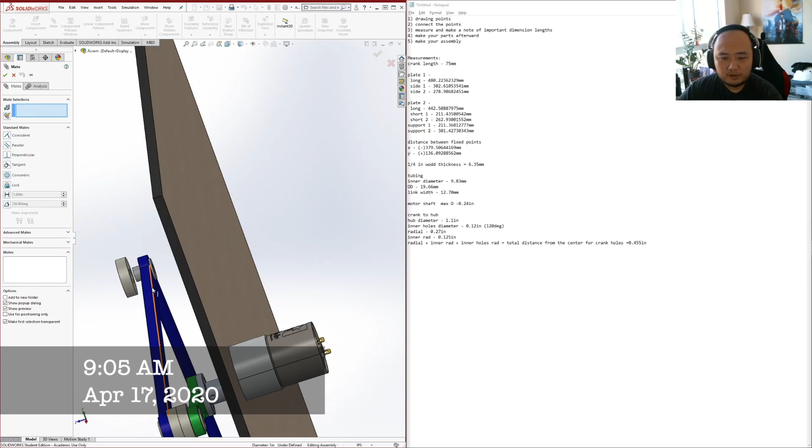I would like to mate this spacer coincidentally to this inner edge, so that's concentric. And then lastly, I will make sure that the wall itself here is going to connect here. So you'll be doing that a lot. And this is going to need to be connected to this part, because when I rotate my crank, you'll notice none of these parts overlap.

But where the connections are matters. So I could actually flip this to connect on the other side, which is something I'm contemplating doing right now. By connecting on the back end, I keep my assembly much closer to the inside, and my center of mass is not too far from the center. So actually I'm going to do that.

I don't think it's ever a good thing to realize you could have done something better and not act on it. So here I'm going to edit this feature and flip my alignment. It's going to break something else, but that's okay because we can go fix that now.

So I'm happy with that concentric part, and then this coincident mate, I'm going to edit this feature. Instead of this face of the plate, I'm going to try to use this other face. It flipped itself, so now I'm going to flip that, and it should be there.

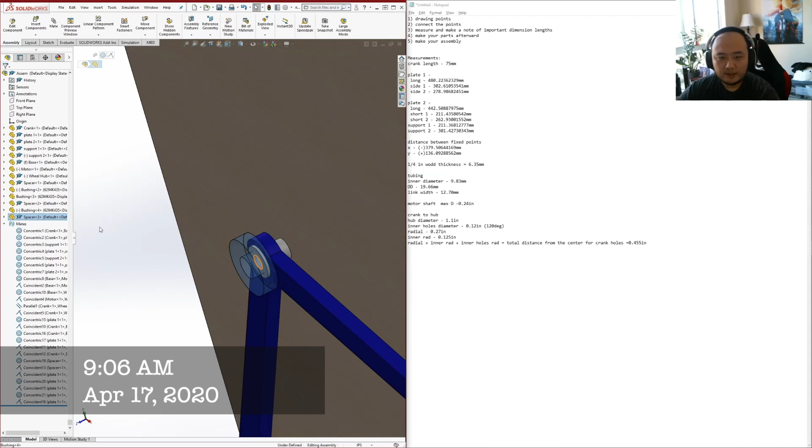When I move the spacer, it'll become much more apparent. I'm going to change this transparency so you see the bushing is in the correct place. Now I'm just going to flip the spacer over, so I can open up the spacer on this side menu. I'll click Mates in Assembly, and then I'll modify this coincident mate.

So now, instead of this mate, oh, that's not what I wanted, but I'll just refresh it. Now this is the mate you will see. And so I'm going to be building this inside the same way this crank was built.

So to do that, I want to connect this to this point. I'm going to add another, you guessed it, bushing and spacer combination. The next few minutes will just be me putting this together and reasoning through how I do it, so if you're already an expert at this, feel free to skip ahead.

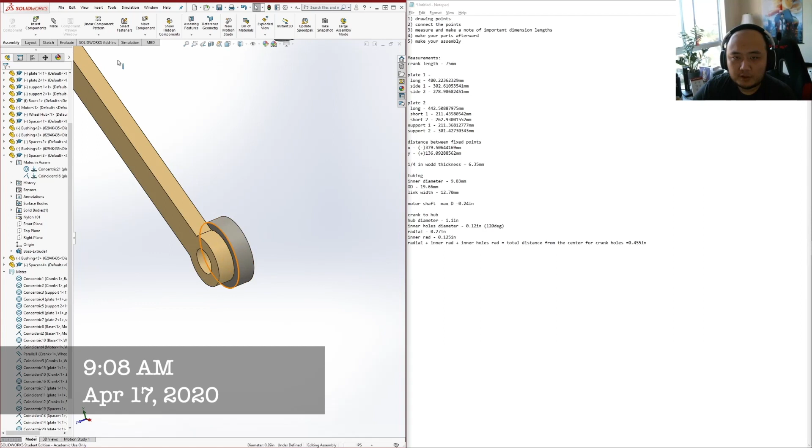So now I'm going to add this spacer. I'm going to make it concentric to this part, the inside of this support. And now we'll make it coincident because I know it's going to go on the other side. I'm going to create a mate from this side to this part, so now when I move it later, it'll look much cleaner.

What's missing here is my bushing, so I'll create a mate of this inside part to the inside of this area. Then I will also have a coincidental point from here to here. I'll just flip that alignment for cleanliness.

Very good. So now that most of this is good, I just need to connect the spacers. I'm going to mate this spacer, the inside of this spacer, with the inside. Actually, I'm going to make this board transparent in a moment.

Apologize for the notifications. I'm going to mate these, and then I will make them coincident as well. That way we are set to go. I apologize again, I did not close all the tabs, but they're now all closed.

All right, so now that should be not component view. That was a mistake. Click mate, select face, and then select face, make them coincident. This looks good here now. So now this alignment means as I turn this crank, nothing's been broken still, but we have most of the things in.

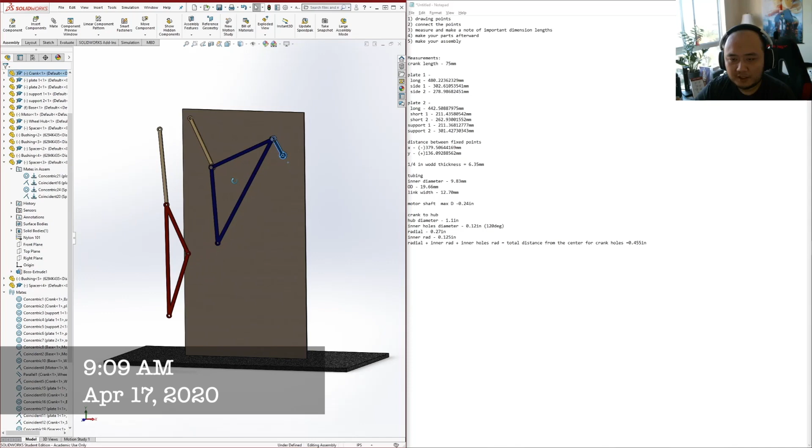Okay, just a few more connections to make. Knowing this position here is also very important because we will later add the spacers and bushings to make this happen. Instead, I'd now like to change my focus to this point right here, connecting the follower to the coupler. I know I'm already going to need 2 sets of bushings and spacers because of each connection. These combinations are very strong.

So put 1, 2, and then let's just add it right now to save ourselves some time. I can also copy and paste it. I want you guys to see everything I'm doing, so it's bushing, spacer, throw it in there.

So on the coupler side, first thing's going to be the bushing mate. I feel Australian talking about all these mates. Bushing mate will be concentric. I'm just going to work on it now, I think you've heard me talk about it enough.

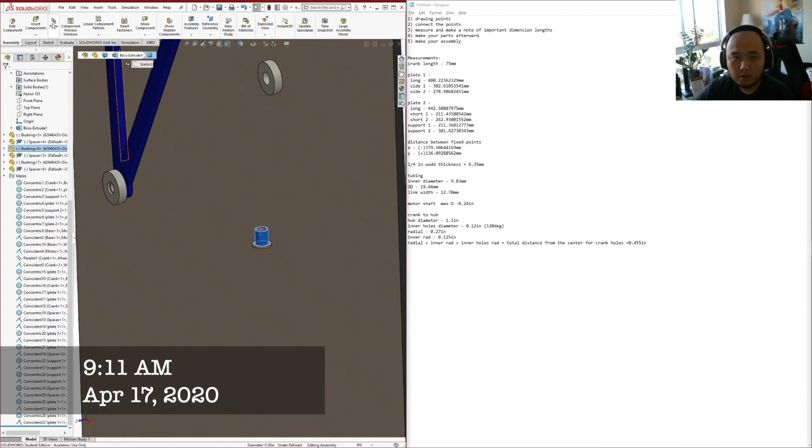One quick note: when you select something to mate already, that part will go transparent, which allows you to click through it in certain tight situations, which is what I tried to utilize there.

Note for each of these pairs of bushings and spacers, I try to make it relative to the actual part that it's connected to, in this case the follower, rather than anything else.

So I selected that part, which makes it easier to select this face for the coincident mate. Now all that's left to do is connect spacers. This will be the concentricity of the spacers themselves. That's concentric. Lastly, these parts will mate coincidentally.

Right, now that's in there. One part I did not take into consideration or modify in the design is this endpoint. I kept it as a circle so you can see in baseline how I did it. You can come back, fill it up, make it whatever you want, because this is going to be your contact point with the ground.

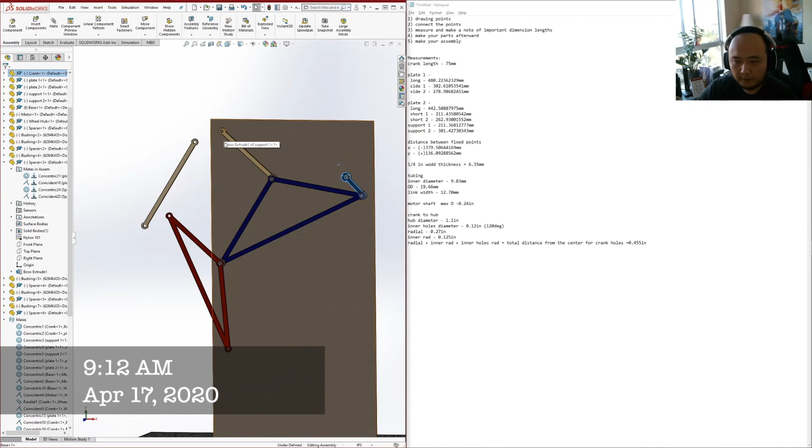So now what's left to do is put this attachment here as well as through here, and go from there. I'm going to attach this follower to its support that we had made. Do another set. Actually, one second. By clicking this pin, I can keep adding things until I'm done with it.

So I'm just going to add enough bushings and spacers to go for a while. I think I need 1, 2, 3, 4 - I think I need 6 more bushings. Maybe I don't need all of them, but we'll go from there afterwards. So now on my spacers, 1, 2, 3, 4, 5, 6.

Now that we've gone through most of the other parts, I feel comfortable to speed up a little and not narrate myself as much. Just back to work we go.

One benefit I do have here is none of my parts will run into each other. If for some reason your parts are coinciding with each other, that's something you'll have to address, and your order becomes much more critical. But in this case, I know none of my parts should run into each other, so I have a little more flexibility and freedom when I'm selecting this.

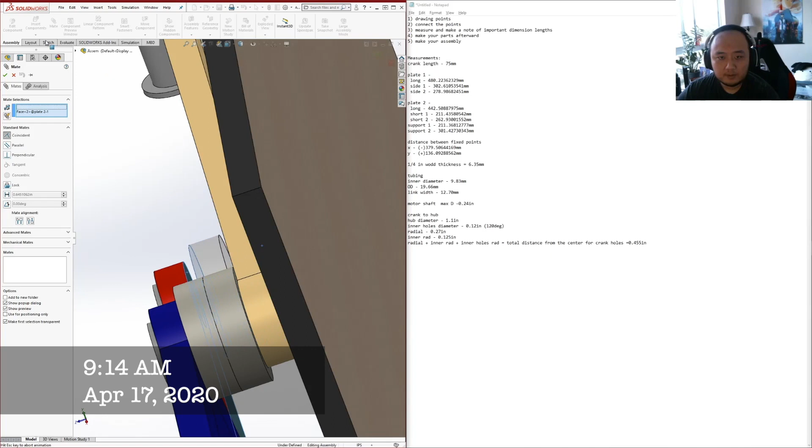I also said earlier I would do something that I haven't done yet. I'll do it in a moment. I'll choose this spacer - you're the lucky spacer of the day. You're concentric. And now you are going to be mated coincidentally. I'm also going to pin the mating thing so I don't have to keep clicking it.

What I would like to do though is make this base transparent. So I'm going to open this drop-down menu, find my base, which for some reason I'm having difficulty doing. You guys probably already seen it, and I'm going to hide it, just to make my life a little bit easier. Now that I've gone through enough, I don't think it'll be too unclear. If you're here and you're confused at what I just did, just skip back and realize what the base is.

So here I'm going to make my bushings on the coupler. I'm going to minimize this as well. Sorry, I closed the history and closed the... oh, there we go.

I don't need that. How do I close this? I already forgot how to close this. Just hide - did not want to hide that. That was a big mistake. Not too sure. Anyways, I'll just ignore it for now.

Selected that, I'd like to concentrically mate that. Flip its direction, make your life a little bit easier. Then select these. That's going to be coincidental. And spacer time.

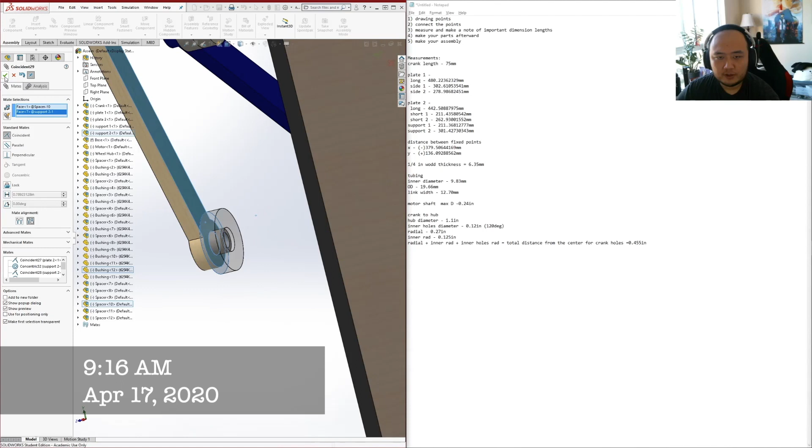That's there. Good thing is I can flip this. I realize this does not look very good. I can flip this whole part on its own. I might have to break - actually, I don't have to break anything to do that, which is really nice. Let me first exit out of this mate and make this transparent. There we go, life made better.

So I'm going to go back into mating. It should still be pinned, which it is. This will be made coincident. Actually, no, I should not do coincident first, I should do concentric first. These guys are going to be concentric to each other.

Which is great. And then I will select this face and mate it with this face. And what happens is it's going to line up like that. I will flip its alignment. Tell me some things were reversed to make this possible. Let's see what it is.

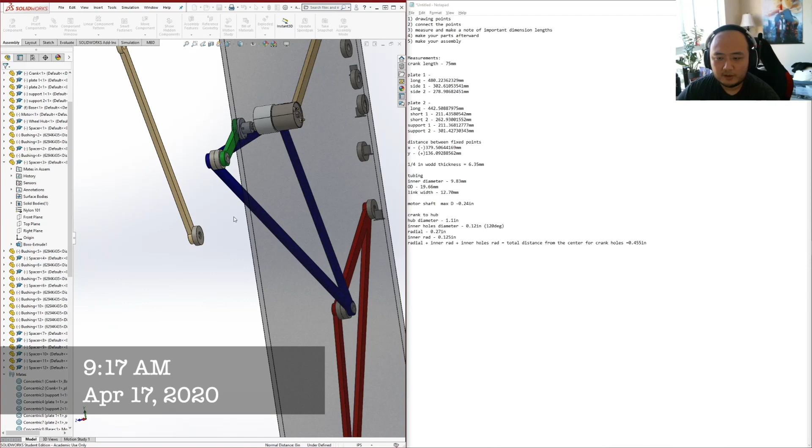I don't like that. I'm actually going to flip this and then delete this mate. I don't like that. So what I need to do is I actually need to flip my orientation of this instead.

So this bushing is right here. There we go, it's bushing 12. So the mates this has need to change. So I flipped this mate, or I edit it - delete the face on the support, make it this one so it reverses itself.

Go from there. Now this spacer needs its mate changed as well. That's not listed here. Go in here, mates in assembly. Should be this one. Edit this feature.

Delete this, make it this one, and we are good to go. Save that. All the other mates should still be fine because those are concentric. Select it here, make it coincident. And there you have it - it's moved back.

Lastly, what do we need to create? We need to connect these two parts because they both go to the same fixed position. We just need to add a spacer and bushings inside here so it's able to connect, and then make enough spacers and bushings to go through the wood as well.

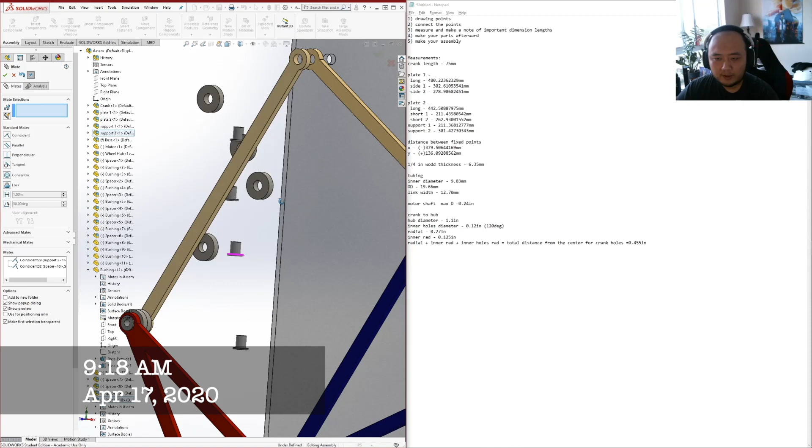So to do that, we're going to put a bushing in on each side. All bushings go in here no matter what because they're very useful in reducing friction between the part and the brass tubing, allowing for best possible movement. Let's go here, one more bushing in the other side. I'm going to flip the alignment and select you. There we go, now we're together.

I'll put two spacers in here. I think that should align pretty cleanly. We'll see in a moment if that holds true.

Make that concentric, and then make that coincident. And one more time, making this concentric, and then coincident.

You'll see the fit is very clean on this side. I'm very pleased with how that looks. And what I need to add now is going to be a bushing inside of here.

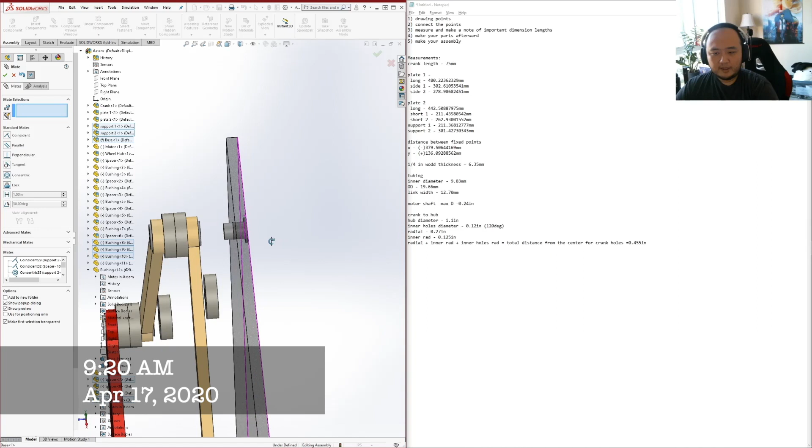Very good. And then I will make the face coincident. Now what I'll have to do is add spacers that go inside of here until we get enough. And to make sure the spacer - actually you don't need to add bushings on this opposite side.

I am curious if I could, but I don't think I need to account for space. Instead, I'll just take all the extra spacers I have here and make it coincident to this radius. This is the one time I'm going to have to undo the transparency of this part because I'll need to reference the circle on it.

So open up my mates, make it concentric - not to the bushing, but to the wall. And because we're going to put it flush, make sure to mate this to the wall.

Now we'll just keep doing this until we bring it up to this part. So I'll connect this one to the spacer, and then here it's coincident again.

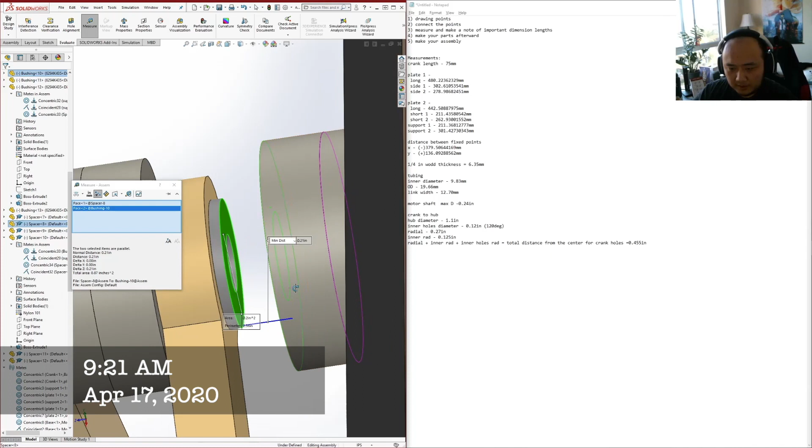And I think I can fit one more spacer in here. If not, I'll have to modify one spacer to fit this gap. So instead of physically testing it out, I'll use the measure tool. I'll select this face as well as this face - it tells me the minimum distance is 0.21 inches.

And I know from measuring my spacers now that they have a minimum distance of about a quarter of an inch. So I'll need to edit a spacer to fit inside of this gap, and then I'll delete this extra bushing because I miscounted. And there you have it right now.

If I put this right here and start moving this crank - sorry, I'll start moving this crank - everything starts moving. And there you have it. Your assembly, sans one spacer here, as well as the tubing, is basically done.

So I'm going to save my work here at this point, rebuild and save the document. We have a few more important details to get through before we get to the motion study and completing this.

But first, I'm going to open up the parts of the spacer as well as, let's see, I think it's the spacer I need first and then the brass tubing. So I'm going to open up the spacer and the brass tube. These are the parts. The brass tube, we need to cut it to length essentially. The spacer, we're going to make ourselves a new one.

Now your options are either to use configurations, but to make it easier on you guys, I'm just going to save it as a new part. So I know that inside of my - oh boy, thanks Steam. I'm going to have to kill a few things on my menu in a second.

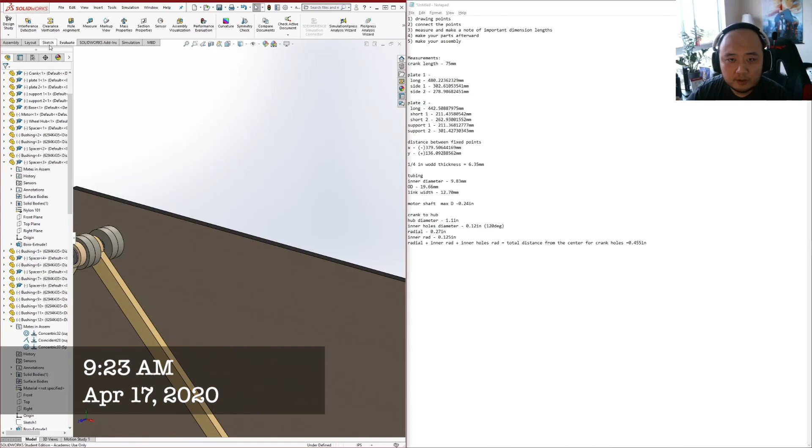Okay, so with my assembly here, I can measure out, using the measuring tool, the distance that I need to cover between this bushing and this spacer. It would be difficult in real life to get this spacer without 3D printing, but since we're using SolidWorks right now, I'm using this to fill in the gap. Maybe if I carefully considered other factors before doing this, I would have avoided this problem, but I didn't. So here we are. I need this to be 0.21 inches in diameter.

So I'm going to minimize this, and then open up my spacer and just edit this extrusion. I'm going to change this feature to 0.21 inches. It's a smaller spacer. I'm going to save as, not save, to replace the file. So I'm going to save as.

Now I want to save as a copy. I do not save it as this top file because then all my old spacers will change. Rather, I want to save as copy and continue. So here I will do spacer and add a dash, I think I could put spaces here, but 0.21 inches. There we go. Now I'm going to go back into my assembly.

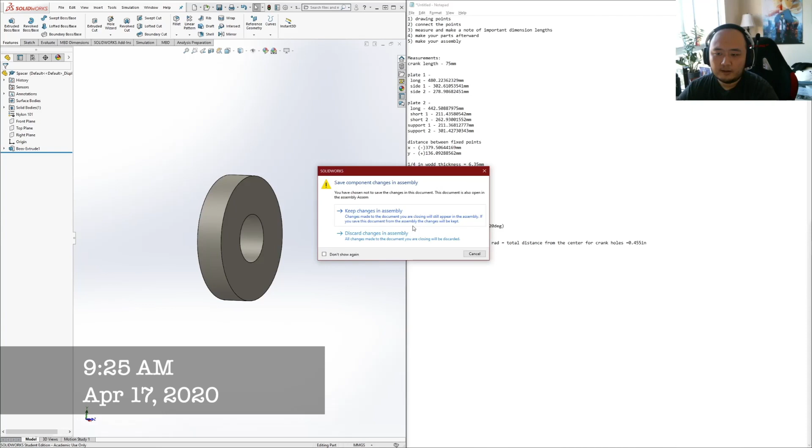Save change to spacer? Nah. I will keep my... actually, hold on, I'm going to cancel. Let me think about this. Yes, I would want to save the changes to spacer.

And now I can go into the assembly. Well, give it a second to get there, gotta load it. There we go, so my assembly is open now. Let's make sure I didn't screw up the dimensions again. It looks like I did, which is genuinely tragic at this point.

So I'm going to open up this part. For some reason, I did not save my changes correctly. You at home can ignore this unless you made the exact same error as me. But I'm going to save this file, go ahead and close it, and I'm going to rebuild my assembly. So now these are all fixed properly. Now we're back where we are before I decided to mess some stuff up.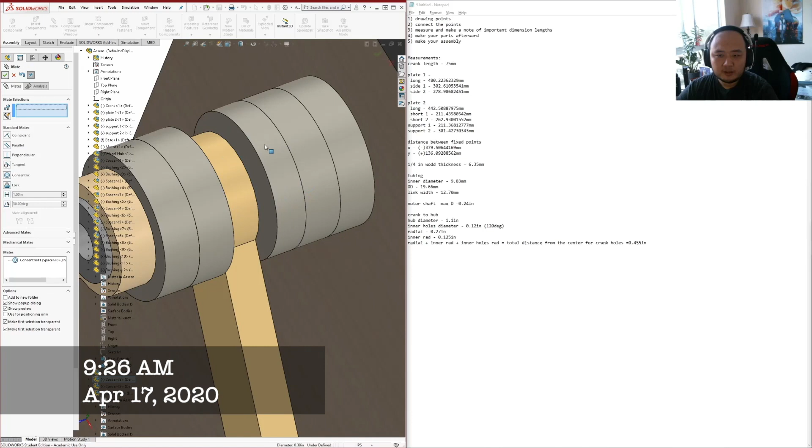So I'm going to take my short spacer file and just add that in here now. I will mate the inner face to here, concentricity, and then I will try to do this coincidentally with this outside area. So it shows there is a little gap. It wasn't perfect, so when I did the measure, I should have measured it to a larger length, but I'm going to keep it with a little gap rather than infringe on the other parts right now.

So there's my spacer, and now I'm going to have to figure out the distance for my brass tubing. I'm going to exit my mate, and use the measuring tool to see exactly how long my brass tubing should be, and then how I'm going to add the lock nuts at the end of that. So I'm going to go to evaluate, open up the measuring tool. I'm going to select the outer face of the bushing and then the outer face of this bushing, and it'll give me the minimum distance of 1.09 inches.

So now I'm going to open in on my notepad. I'm going to check for my brass tubing distance. I know that min distance is going to be 1.09 inches. I also know, because you've listened to this video and listened to me talk, that I do have an item that is going to connect on both sides of the brass tubing, and that is actually going to be the set screw shaft collar. So I'm going to copy that and put it in my files.

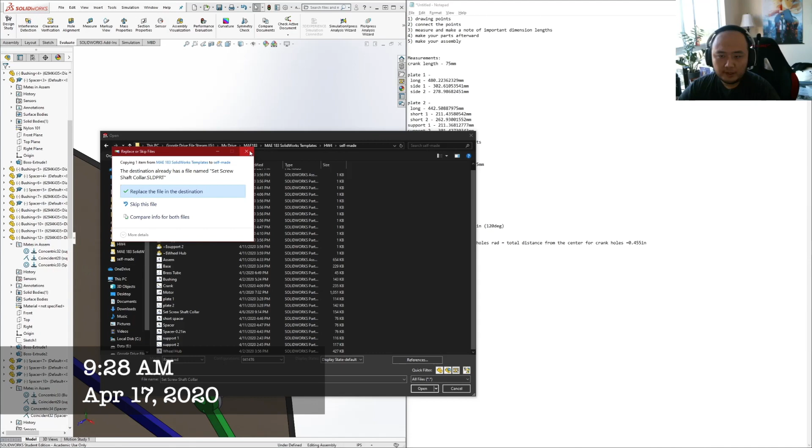Turns out I already have it, so I just missed it. I did, I'm just trolling apparently.

So I have a set screw shaft collar. This is what's going to go at the end of the collar, one on each end. I'm going to evaluate this by measuring the distance from this edge to this edge. It has a 0.28 inch minimum distance.

So now with one on each side, that means I'm going to have to add 0.28 inches on both sides, which means my total brass tubing length is going to be 0.56 plus that, which is going to be 1.65, I think. Yeah, 1.65 inches. Double check so you guys don't think I'm pulling a fast one.

We pull the calculator over from before, clear it, get 1.09 plus 0.28 plus 0.28, 1.65 inches.

So now that I know that's going to be the length of my brass tubing, I'm going to minimize my assembly, open up my brass tubing, and change my feature length, because almost all of them are going to be the same except for a few. We'll address the unique ones later. So this is going to be 1.65 inches.

Remember, it's fine to be shorter or longer because it's a set screw shaft collar. We just don't want it to be too long because then it might get in the way of the other parts of our assembly. So I'm going to open up my assembly, and I know that I'm going to need a tube here, here, here, and here.

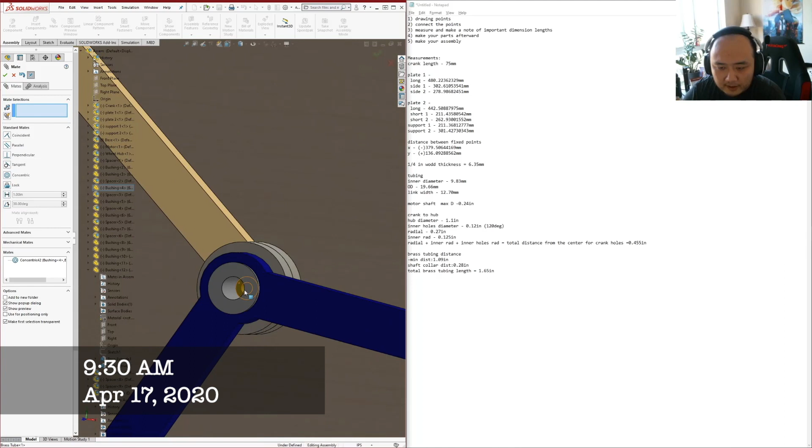I'll make it a little easier on you guys and show you the faster way to do this. You actually add 4 of the shaft collar. I mean, sorry, not 4. Yeah, I need 2 of them, so you need 8. So I'm going to add the 8 shaft collars first.

My bad. So by adding 8 of the shaft collars, you can add them into the assembly and just bring the brass tubing to the outside edge of the shaft collar, because we did the hard work in the measurements before and we just need it to line up.

So here are my shaft collars. I'm good with inserting components. I will mate this first concentrically with this part. And this is when you have a little bit of leeway in being a little lazier.

Now, unfortunately, I need to find my shaft collar again because it fell inside. Hopefully if I move... oh, it's concentric, it's not going to come out. So I goofed a little bit inside of here.

I have to make a lot of these parts transparent to find it. Is that it? Can I pull you out? Almost. So I just need to make this part transparent and I should be able to access my shaft collar. There we go. Now I can go back, right click all this, and fix these transparencies.

Try to avoid that problem when you do it. That was a mistake on my part.

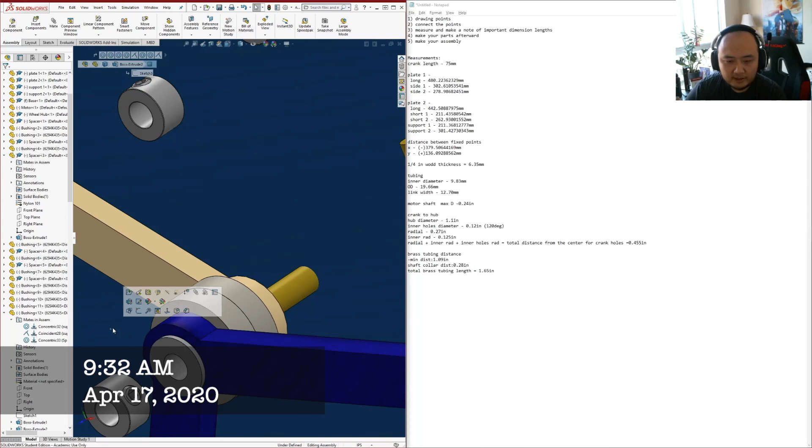Okay, so now I'm going to mate this part to the inside face of the shaft collar. And voila, now I have one on this side.

I'm going to take my brass tubing and I want that face to be the same level as this, so coincident. And I'm going to hit checkbox. Now I know where my shaft collars go on the other end.

So I will start doing that. I probably won't talk too much while I do that. Maybe do one more. I'm going to change this to transparent to make my life a little bit easier. And it's time to start mating again.

You'll see that that's quite a good fit. Very pleased with that, and we'll let that go. Perfect.

Let me just check one thing from the side. Are these screws going to get in the way of each other? The answer is no.

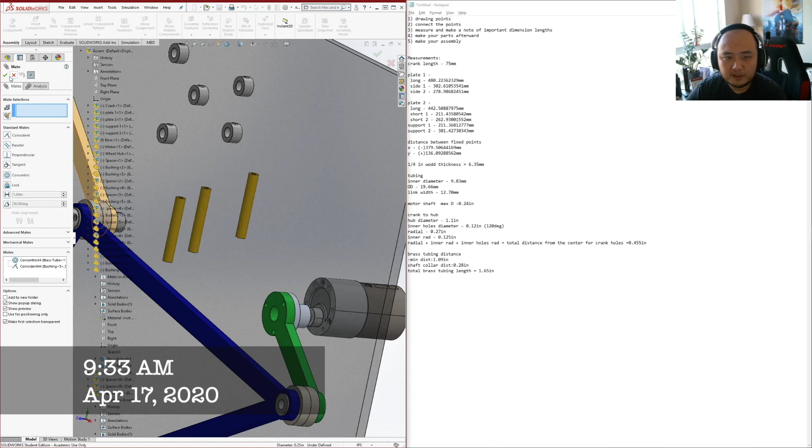See, I made that same mistake again, where Control Z comes into play. Pretty sure it's in there, so I have to go find it again. That was a mistake, I should not have done that. Oh well. Oh, nope. Turns out I Control Z'd enough times, I think. Let me double check. I have 1, 2, 3, 4, 5, 6 collars. Yep, that was fine. Did not need to do that. It's okay.

All right, so what I'm going to do actually is select the face first, put that on the bushing, and then mate that. I think that is definitely the smarter approach to avoiding the problems I ran into just earlier.

Notice on the same side, flip the alignment. Good, and then I will just do concentricity now. I'm going to do all these set screws first before I do anything else.

Find that part. Is that line well? Good. Okay, you're concentric.

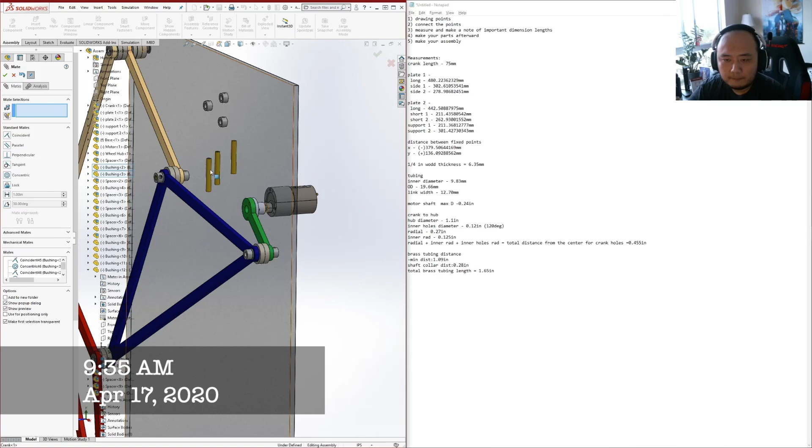Put your brass tubing inside now. Pick an arbitrary one for it to be concentric to, and then select both faces for you to make it coincident. That's another one done, and now just a few more, and then we'll be scot-free on the brass tubings until...

Well, that is until we look at this top one. But that's just measuring and making yourself a unique one.

It's going to be that face here. Ah, I selected the wrong face on the shaft collar, so I will select a proper one now. No, sorry, I'm experiencing a little bit of lag here.

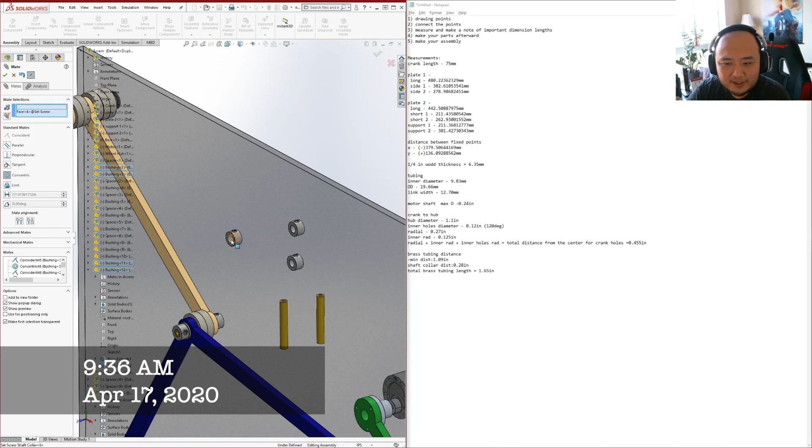Zoom in. I think it's this one. I actually do not recall now. We'll see if this one gets weird or not. Yeah, there we go.

Ooh, and then let's see, where am I going with the last set? This one. So select the faces. Turn it around. Going right there. Make it coincident.

Now I'll make it concentric. All right, one more shaft collar right here.

That's gonna go here. Yep. Selected the wrong face, just gonna delete that, select the proper face, and make it coincident. I had the wrong one, there we go.

So I'm just kind of looking across my screen. I kind of have an idea of where I'm looking for my parts. So if you don't see it, you can go back and play it in slow-mo. If you're already good with this, don't worry about it, just speed through it. So now I have everything on in here. And I'll put my brass tubings in.

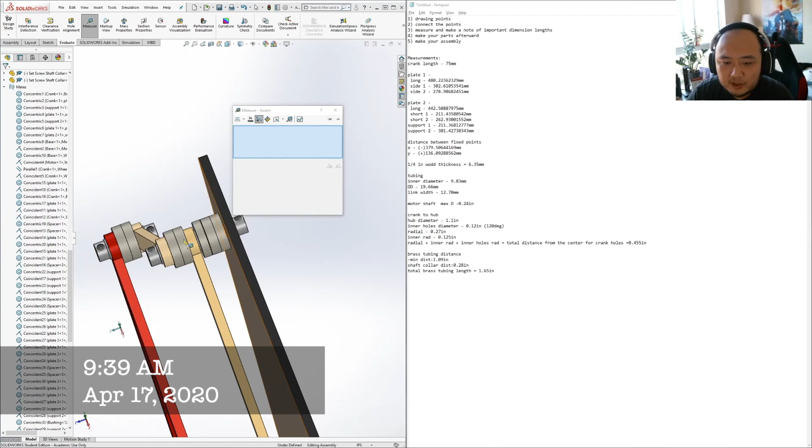And so this last section here is where we're going to measure this brass tubing, put the brass tubing in, and call it a day from there. So here I will open up Evaluate, my measure tool, clear all previous selections in case I had any open.

And I will take the measurement of what the minimum distance is here, 2.68 inches. And also go max distance, see if there's a difference. Nope, 2.68 inches. So max distance, 2.68 inches, put that in the notes because what we're gonna do is save, and then open up the brass tubing we have and make the longer brass tube. Put that in there and then we'll have completed our assembly and move on to the motion study.

Brass tubing is here. Edit the feature. Remember, it's 2.68 inches, you can put that directly in there. It'll convert it. Now what you need to do is click File, Save As a copy and open it.

I'll say long brass tube because there's really the only one here. Close this up, I do not want to save changes to brass tube. And then I do want to keep the changes in my assembly. I'm going to restart the assembly or refresh the assembly.

It seems like I should have saved it. It seems like I'm not an expert enough at what I'm doing right now. But I will first edit this part, shorten it to what it needs to be. So click this and...

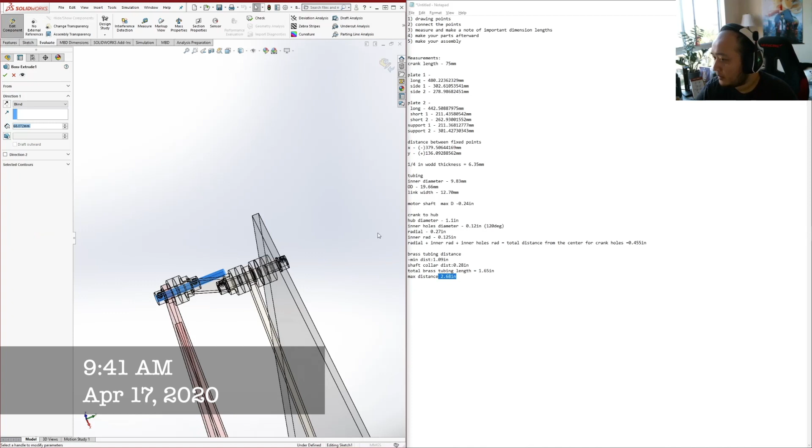Edit this feature. In my notes, I still have the total length as 1.65 inches. Put that in there. Finish editing my component, I'm pleased with that. Now I will insert my longer brass tube, so I insert that part. Now put the mate, concentric, add some faces.

And we are good to go. You should pop up on the other side. There we go, your brass tubing's in there.

So if I close my mating and look at this from an isometric view, you'll see everything's been connected as it should.

Some of these bars are actually not where they should be, so I'm going to look into this right now. I think I needed to fix this, I'm going to open this part. Actually, I'm just going to fix it here.

Close this, save the changes there. Now the assembly should look normal again. So the brass tubing's still in there.

I'll look at it from the front view so you can get a good look at it. All the brass tubing is inside of there, the shaft collars and whatnot. And as I turn this crank, it's still moving. We're set to go.

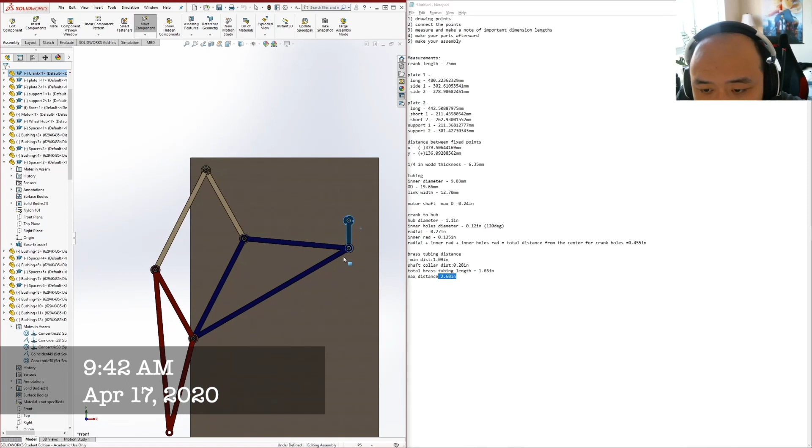And if you've gotten this far with me, congratulations, you're almost done. I'm going to save that again. And now we'll get ready to go on to the motion study.

I'd like to begin by first congratulating everybody who's completed their project up to this point or their homework assignment. Here we're going to look into how to actually perform the motion study to create an animation.

So to do a motion study, for those of you who have not taken 152 or may have forgotten 152 like me, yes, I did undergrad at UCI as well. We're first going to go into the motion study tab.

I'm going to click it again. It should pop up with the actions underneath, but I'm going to click this button, motor, and it'll give me an option to generate a motor. Then I'm going to put it about the crank, so it's going to rotate.

And then I'm not going to do 100 RPM, let's do 10 RPM. I don't have that much of a need for speed. So I do have my rotary motor there.

I did not mean to take a screenshot, I meant to change my view. And here, let's take a look at playing the motion study.

So by playing the motion study, I'm just having my crank move at 10 RPM. You'll notice that it's glitching a little bit, that's mostly because I don't have this on full screen and I'm using OBS to record this.

Let me maximize this a little more and see if I can change my view. So, auto key, I don't need that.

I'm trying to see if I can just make this screen a little bit better. I'm going to look at motion study properties. I'm going to up this to 60 frames per second. That way when you're looking at this video,

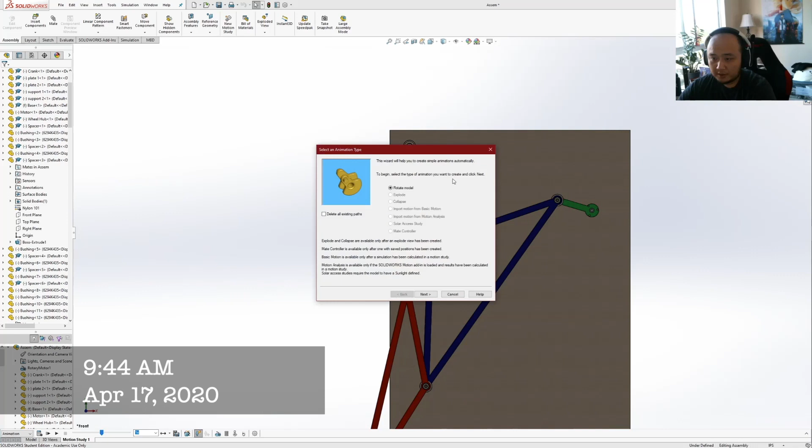But here I'm just going to... I can save the animation, but I do not want to rotate the model. Rather, I would like to figure out how to set my window frame, which is something I'm not 100% sure of right now. But let's set up this and let's just save animation.

Let's see if I can change the... call it animation 1. Can I save as an MP4? God bless, I can. Image size, I have a very large monitor, so it's a little messed up, to be honest with you, but let's do...

I have a 2680, but I have a 2560 by 1440 frame, let's just do that. Okay, well that's, apparently it's set one. So we have that, fixed aspect ratio.

Let's do the entire animation. Let's see if we can do 60 frames per second without destroying my computer. Let's see what that's going to look like.

So right now it's saving, it's actually going through the entire motion study. I'm going to let this run for a little bit and I'll put at the end what it should look like.